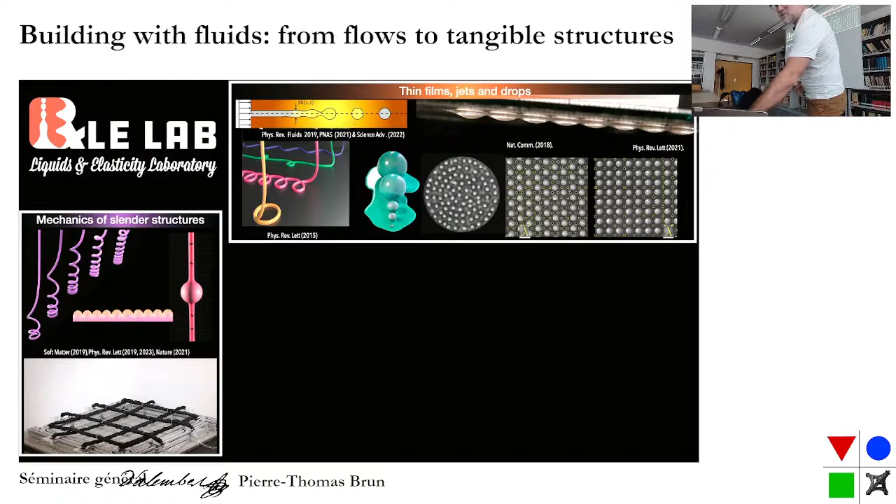So films, droplets, I'll talk a lot about that, elastic rods and membranes, and with a passion for shape-changing structures like this inflatable. We also did some fluid-structure interactions, unconventional, let's say. So this is a rubber balloon, and we did also some multiphase flows in deformable structures. I will not talk about that. Today I'll talk actually about this empty box here, which is the conduit that you can have between fluid mechanics and elasticity.

And the way I want to introduce this idea is through a little bit of rheology. So this is the rheology of an elastomer that's cross-linking. You don't see the line very well, but the blue one basically is a loss modulus, so tells you how liquid something is. And the orange is the storage modulus, so tells you how elastic something is. So you see that at the beginning, blue is above orange, and it's a log scale. So it's more viscous than elastic. And at the end, it's more elastic than viscous, right?

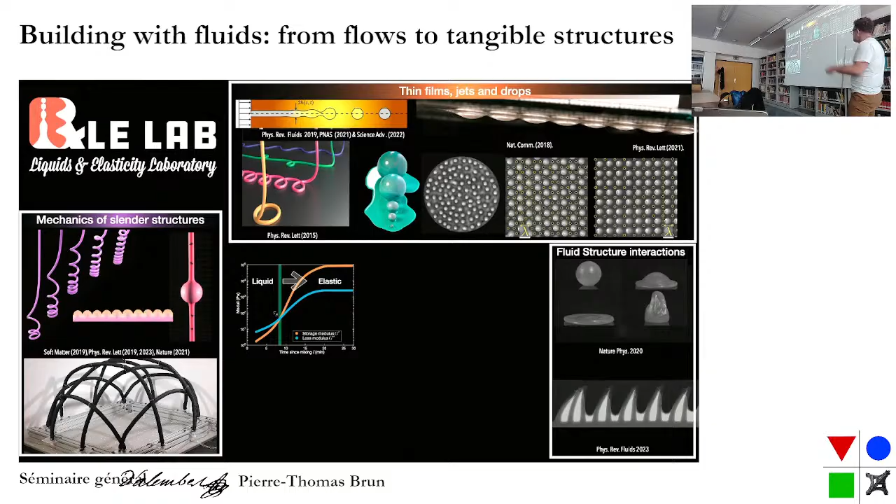So it's this famous polymer that many people in this room know, vinyl polysiloxane, right? And so you mix them, they cross-link, and you go from a honey-like structure to a rubber in 10 minutes or so. Of course, this solidification is something that's pretty common in nature. We have icicles, but also people do this in art, sculpture, for example. But it's also a central aspect of industry, right?

So if you actually look around yourself, many things here were once liquid, right? So concrete, the glass, and so you use their malleable form, you constrain them in a way that they meet your desired ideal. And so what I propose today is to remove all constraints and to let things flow the way they want. And if you do that, I think my video has disappeared, doesn't matter, but you can have interesting results.

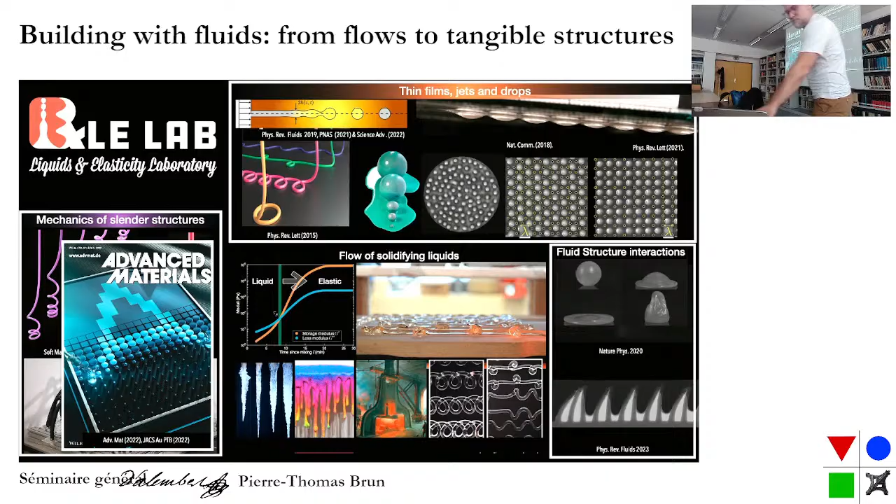So actually, I did my PhD on the coiling of viscous threads, and this is a viscous thread here. The only difference is that this is molten glass. And so when molten glass cools down, you have this nice structure. And so the idea is we will try and see how we can build materials by harnessing fluid flows and interfacial fluids. So why do we do that?

I think you have to live under a rock if you've never heard about mechanical metamaterials, especially here. So I will not spend too much time introducing this, but this is not just about mechanics. It's about many fields of science: acoustics, optics, and functional surfaces. There is this idea that if you have a structure, you can emulate a function, right? So it's also inspired by nature, if you want, and people are working on that quite a lot.

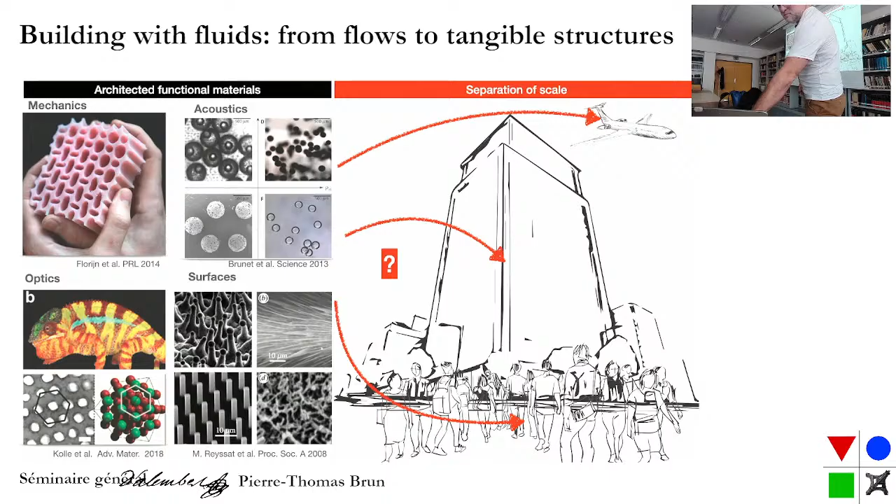One issue, essentially, is that the scale of these objects is typically small. And by small, I mean a few microns or tens of microns, maybe a few millimeters or centimeters. And we're saying, okay, we're going to use this to build our next buildings, airplanes, textiles, and everything. It's not exactly clear how you can master the architecture of something at such a small scale and make it actually available and cheap for everyone to use to build buildings, skyscrapers.

Conversely, if you look around in nature, you go and walk on the beach, you will see very nice and very similar patterns at very large scales, right? Those ones come for free. They come through natural processes. So, for example, the dewdrops here on the spider web come through some variation of the Rayleigh-Plateau instability, or else these nice patterns on this type of ice cream.

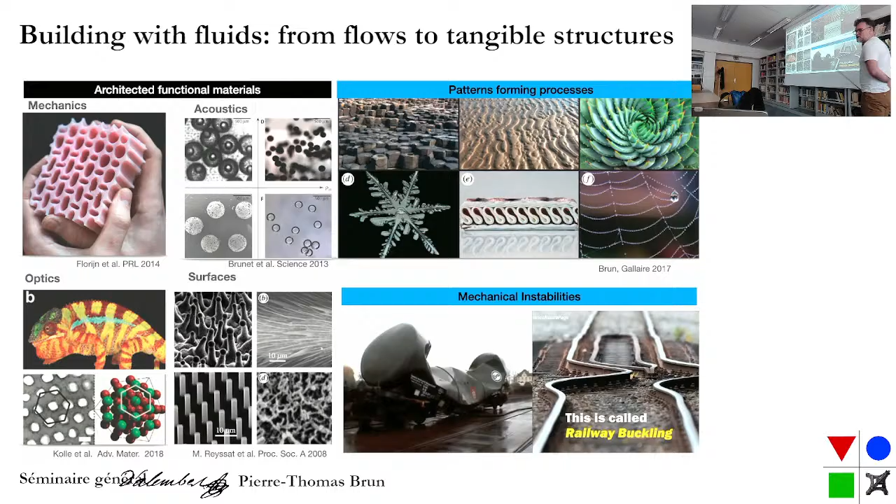And so the thing I want to point out is that many of those processes can be built by mechanical instabilities. And the question that we're trying to understand is, can we harness these instabilities so as to actually build these materials? And people from industry have done this for a long time. So this ice cream, there's just a nozzle here. The ice cream comes in excess onto a conveyor belt. It buckles, and the rest you eat. So you can harness essentially this buckling instability to fabricate structures.

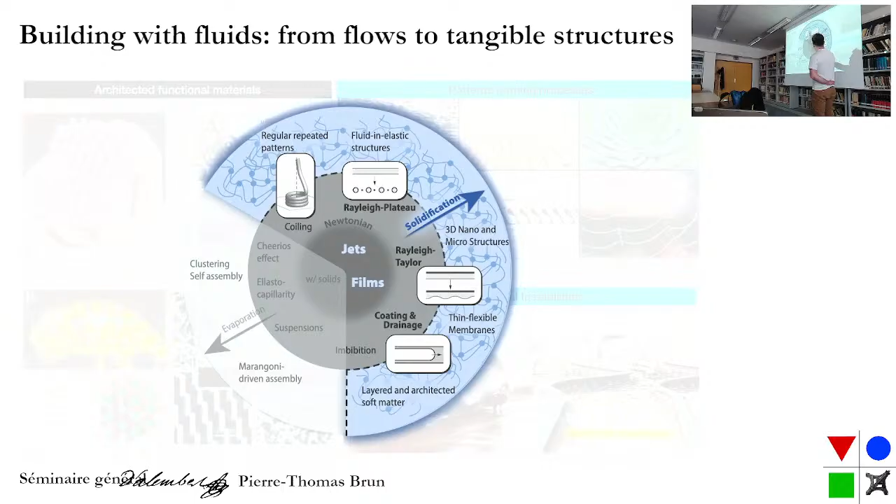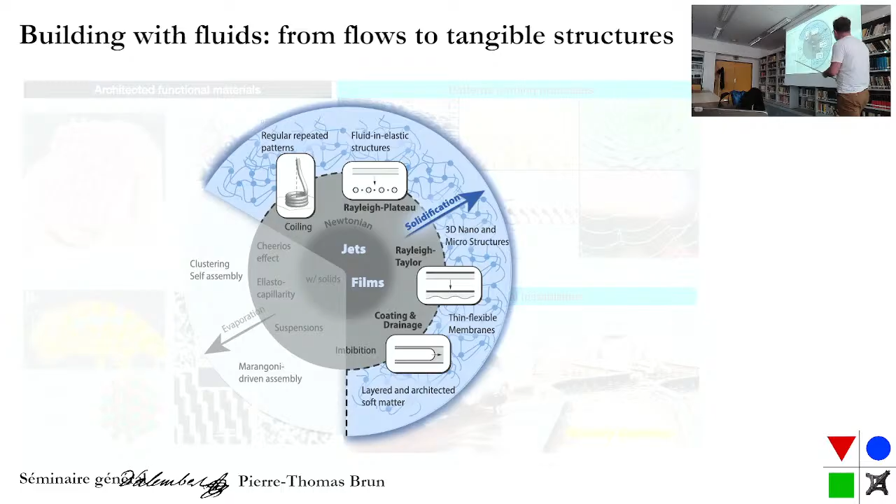And so when I started some years ago, I made this roadmap basically and said, okay, we can go into Rayleigh-Plateau, Rayleigh-Taylor, some other known instabilities, and try to solidify these structures. Of course, those things are well known in Newtonian rheology. They're actually also known in more complex viscoelastic fluids, but people usually don't worry about the solidification of those things. So today I'll talk about too many things, I think, but I'll try to give you a bit of a potpourri, a good aperçu of many of those things, and I'll focus on one instability.

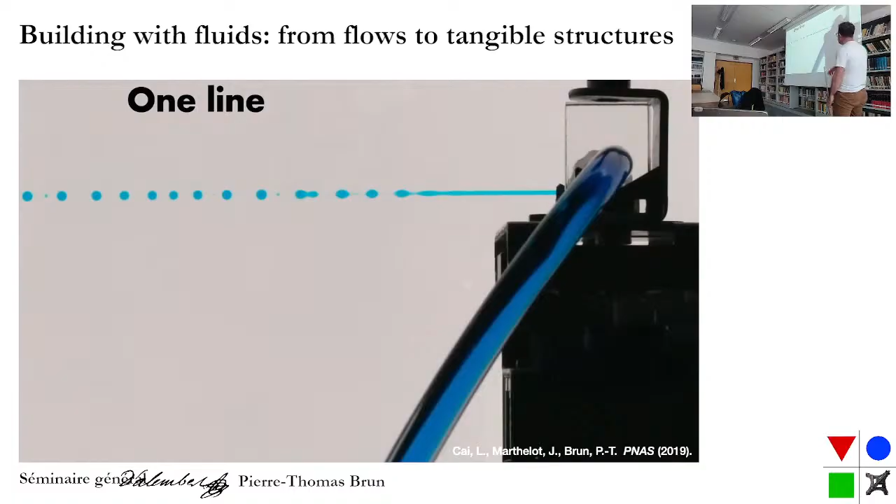So this is just an example. Here, what you see is a bath of oil, a top view of a bath. And what you're about to see is a needle that's dragged inside this bath, and we're extruding glycerol. Glycerol and oil are not miscible. So we're drawing a line of immiscible fluid inside the bath. Without surprise, what happens is exactly what happens when you open the tap. It breaks up through the Rayleigh-Plateau instability, and you have a collection of drops.

What happens is that this, okay, so that's the side view essentially of the experiments. We move faster than we inject, and so we stretch the thread before it breaks. And what you know is that, okay, let's say that this is this stereotypical instability, so K squared minus K4. I have this dispersion relation.

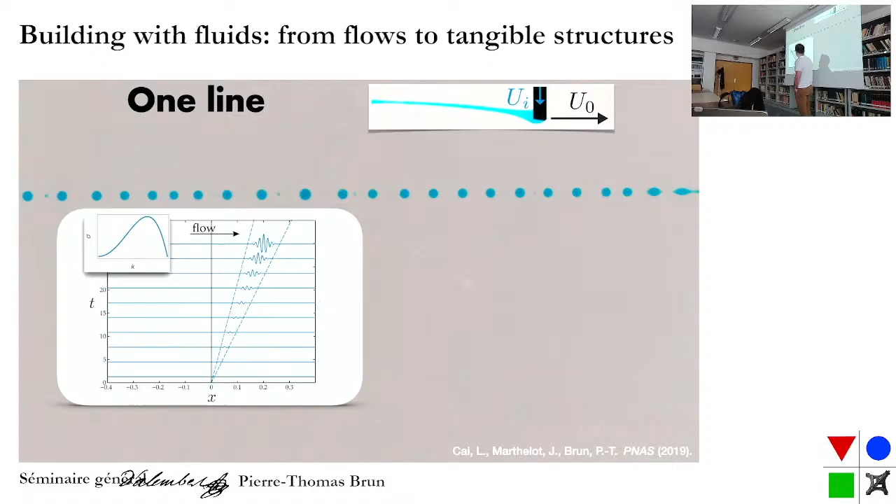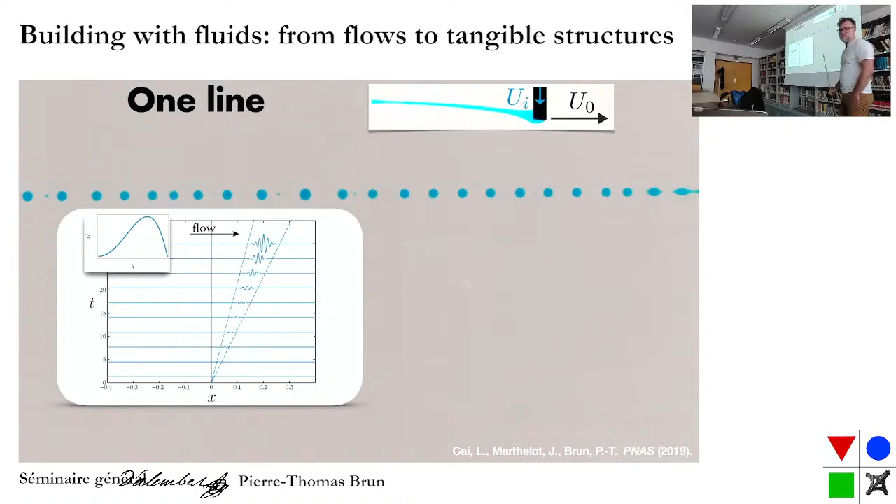I expect that I will only observe the maximum of my dispersion relation as the mode that dominates, but the sad news for this case is that actually this instability is convective, and so you also drag essentially a lot of noise in your system, and so the droplet breakup is not perfectly regular. So what do you do when you fail?

You repeat, right? So now we do the same thing, and instead of just the same first line, actually it's the same moving, but what happens is that we're going to print a second line next to the first one, and then a third, and then a fourth, and so on. And don't worry, I'll accelerate the movie, otherwise it's very boring.

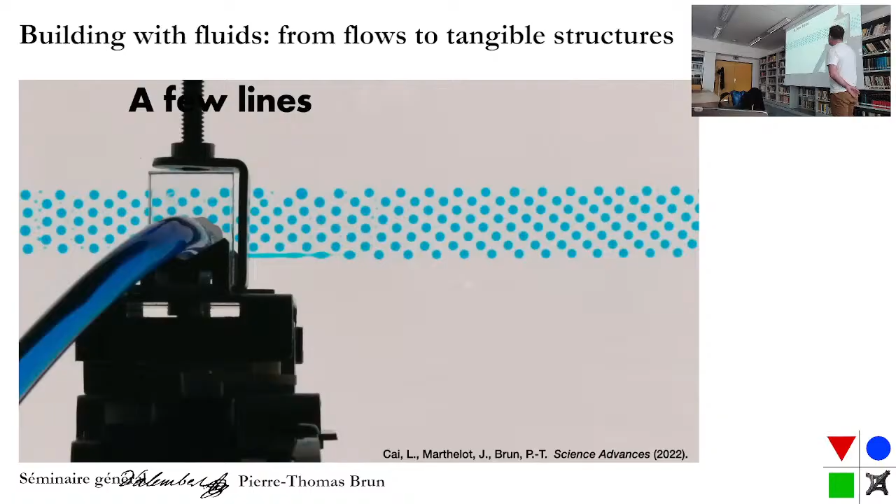But you can start to see that things get better and better, and as you keep going, there is this emergence of something that appears to be very regular. If you look carefully, actually, it's not perfectly regular because of boundaries, but it's actually much better. So, for example, if you plot the drop radius, or if you colorize by the drop radius, you see that whatever defect you may have had at the beginning, after a few lines, these things are forgotten.

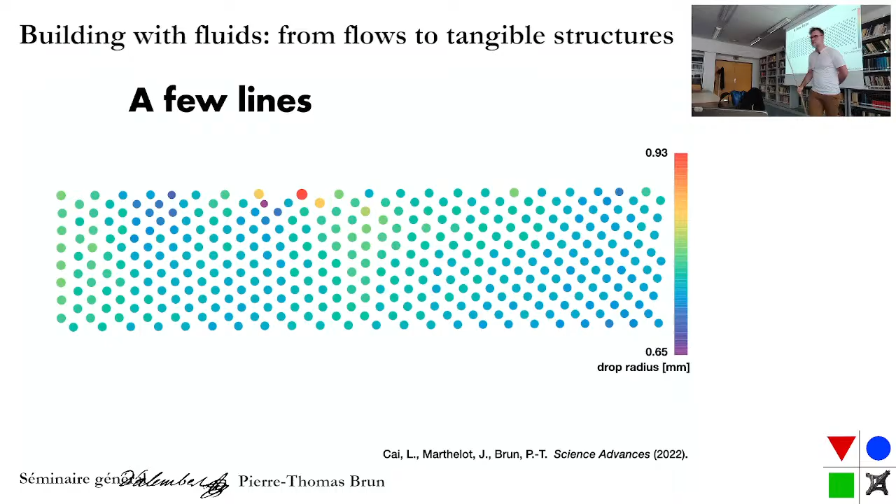And the reason for that, essentially, is that you're taking instability and you're applying instability on top of an instability. And so the mechanism is this one. So we know that when we have an instability, basically we're having an exponential growth of whatever we call epsilon, right? So when this is linear stability analysis, we assume that this epsilon is small, but it's rarely specified what this epsilon is.

And in this case, what happens is that when we're printing a line next to an existing line, the perturbations of this one, they actually are inherited from the previous one. So if you want, it's like if you were taking some sort of convolution of this perturbation by itself. So it gets more thick and more thick.

Another way of looking at this is you realize that if you take any daughter drops, it always sits at, not the middle, but at some fraction of the distance between these two ones. So if I look at the distance between these two drops, I can argue that essentially this is some sort of algebraic average of the distance between the two mother drops.

Right? And so essentially, initially, you have a noisy signal around the mean, and you're taking an average of this signal, and an average of this signal. If you take a running average of something that oscillates, you know that you're going to smooth essentially to something which is flat. So you're converging to this mode. I spare you a lot of details, and I take a lot of shortcuts.

But the one thing that we also know is that these things are sort of alive. So when you drag the next lines, the drops move back and forth. And so you can basically create all kinds of crystals that have the same wavelength, but that have a different phase, right? So like this, these two pictures, they have the same wavelength and then a different phase.

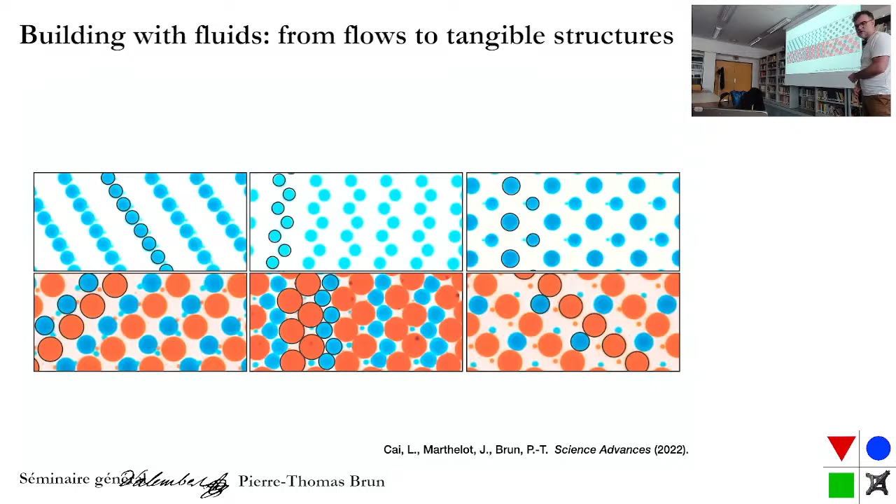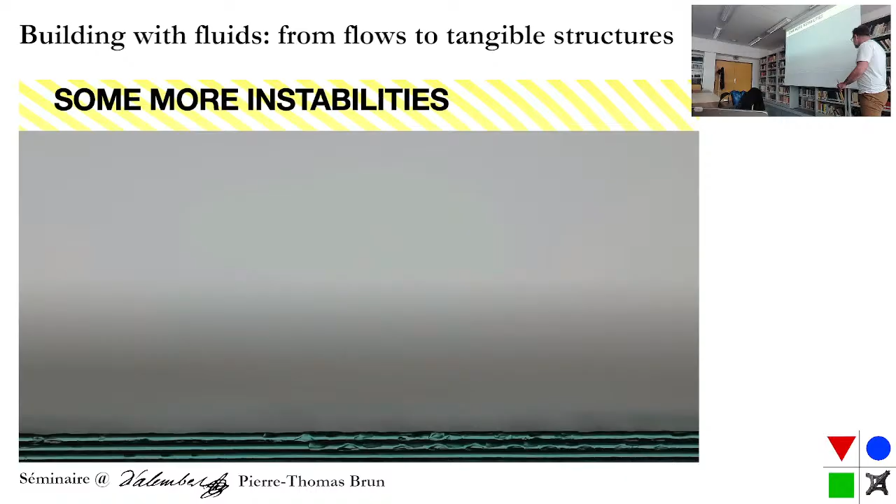So that was the first story. I'll showcase another instability, mostly because we don't really understand it, but it has similar features. So this is an FDM 3D printer. You're printing just regular lines, and three lines have been printed. With this printer, you're trying very hard to break it. So we're actually under-extruding, meaning we're not providing enough material to build the wall. There is a lack of material, and what we observe is this.

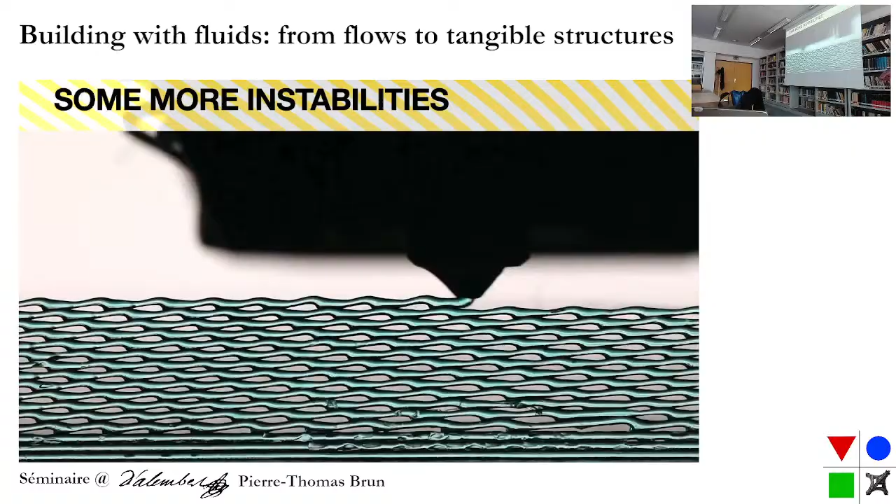Instead of having a thin thread that we're stretching, we see the occurrence of this type of instability where it forms a sort of dotted line. This isn't very regular because we're close to the onset, but you can get much more regular structures. What happens is that as you stretch, the thread cools down very quickly, and as it cools down, it's impossible for the feed to arrive back to the thread. So you're forming a drop that will eventually impinge on the previous generation, and like this you're building this type of memory. Unlike the previous one, there's a coupling between the flow and the curing, but we don't fully understand everything, so I won't say too much about that.

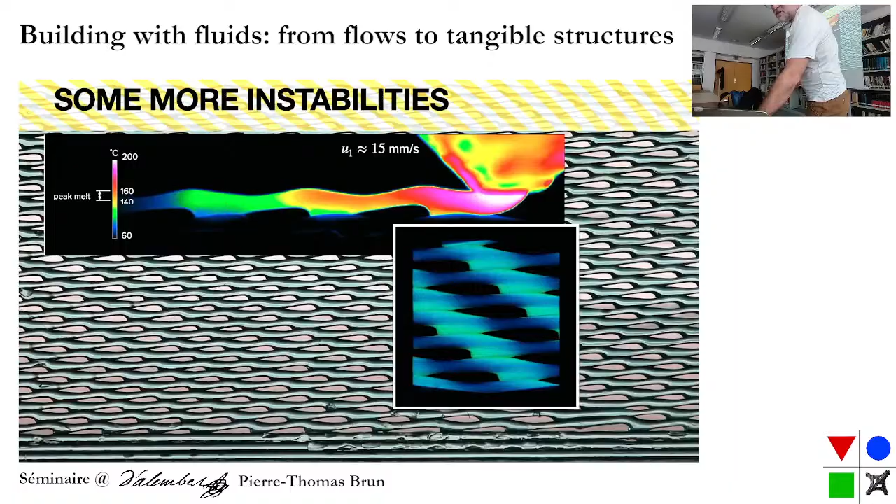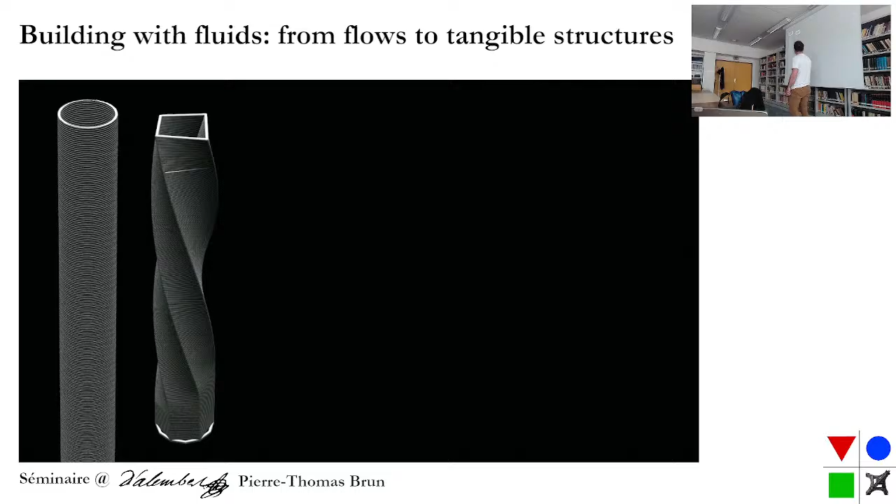I will say one more thing: you can make towers. If you make towers, you don't have enough material, so instead of forming this nice cylinder, the rope takes shape and you anticipate the formation of structures that look like this, and indeed that's the case. All these prints are the same in that we're trying to form essentially a cylinder, but we don't provide enough material, so we see the appearance of these nice structures. But this is merely advertising because, like I said, we don't understand everything in this phenomenon.

Yes? Sorry? Axis? Yeah, no, this is just a set of pictures. But you can find that basically the less material you provide, the fewer corners you will have. So the more material you have, the closer you are to this.

A few buckling-like modes—it's not buckling at all, but it looks like it's buckled, and actually it's the same thing as the previous instability. If you have less material, you convert to something that looks like this, which I think is a different instability. And the less material you provide, the more you'll eventually get to something that looks like this. So indeed, these ones have less material than those, and less material than those.

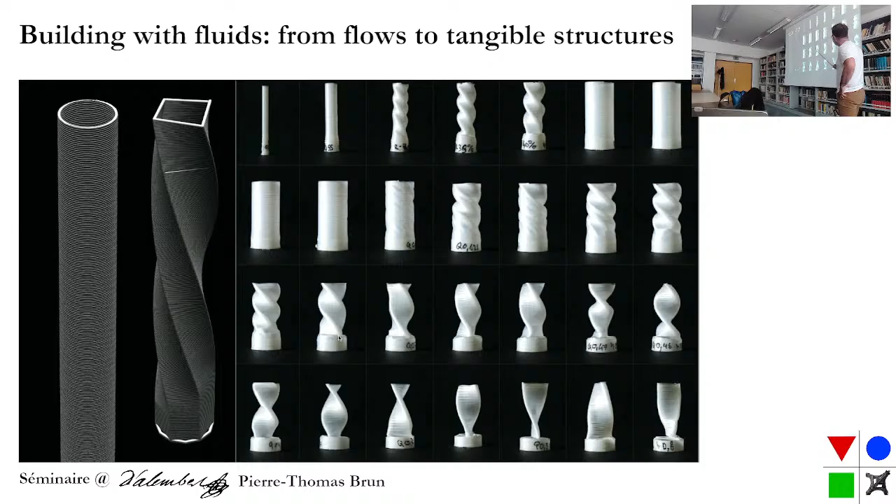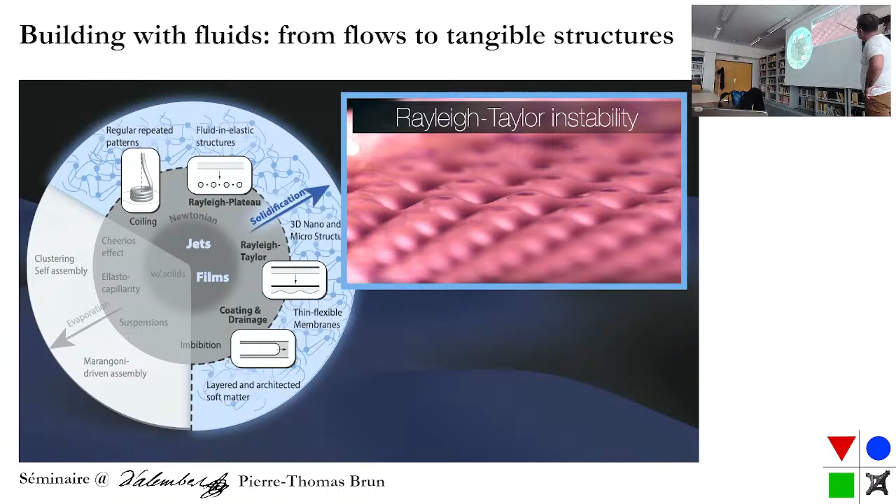Okay, so I'll move to my second story, about the Rayleigh-Taylor instability. This story actually started at EPFL, a long time ago. It's what happens if you coat a flat substrate and flip it upside down, or it can happen by accident if you apply too much paint on a roof—it will destabilize and create drops. Or when you're cooking pasta, on the underside of the lid, you'll see these instabilities forming. You don't see it very well here, but this is a polymer, polyvinyl siloxane, coated on the underside, and now we form this nice network of droplets.

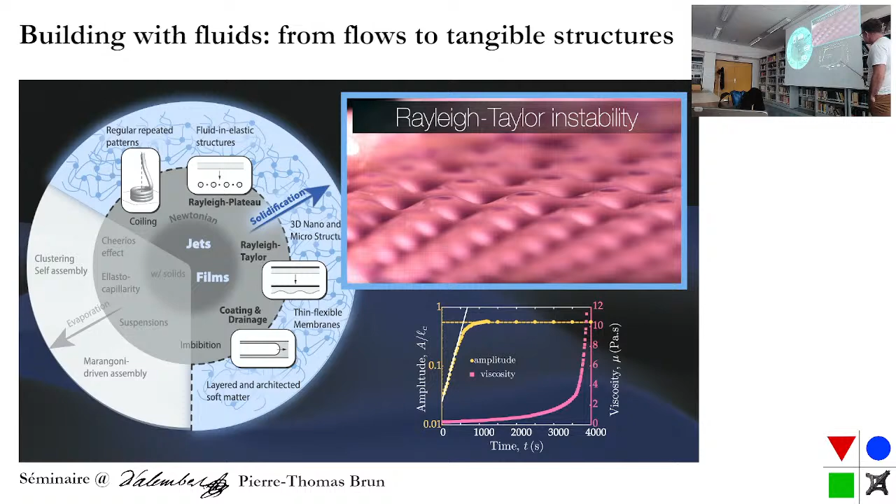This is the viscosity of the polymer as a function of time—basically a doomsday equation. You have mu, which is mu zero, the initial viscosity, divided by something that goes to zero violently, at about 4,000 seconds. But for the time of the experiment, this is more or less constant viscosity. And then these droplets—this is a log-lin line—have an exponential growth, and then when they're lacking material, they saturate, and their size becomes constant over time, and eventually things are cured.

And because they're cured, you can do things like inflating these things. Don't ask me why, but you can inflate them just to show that they're elastic.

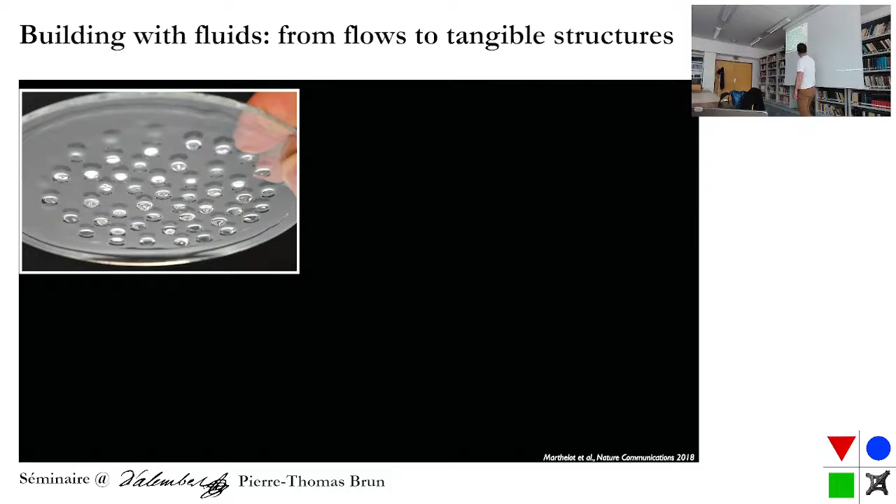Okay, this was actually a very nice idealized view. The reality is that even if you work very carefully, what you will obtain looks more like this, right? And so what I mean by this is that there are big drops and there are small drops. Another way of looking at this is you can take a Voronoi tessellation of these drops, and so you see that drops basically have access to different volumes of material. And so, where you were expecting maybe a hexagonal lattice, you actually get something that's a little bit more messy. Okay?

And again, that's the same idea as before. Essentially, this instability starts where the defects are. The defects are usually at the edge, so you propagate in waves in the form of rivulets. The rivulets grow, they break into drops, so there is a long and complex history. After the droplets are formed, they can still talk to each other. They flow, they can merge, they can drip. So there are all kinds of complicated stuff that happen.

But what we discovered with Joel is basically that if we were to make little holes into the plates in which we're making these coatings, and by holes, I mean we actually laser impulse on the acrylic, so we make little dents, and we make these dents at a size that's about the size that we expect from the instability, right? So everything is in the about, right? So the distance between droplets is 2π√2 the capillary length, so 10 times the capillary length.

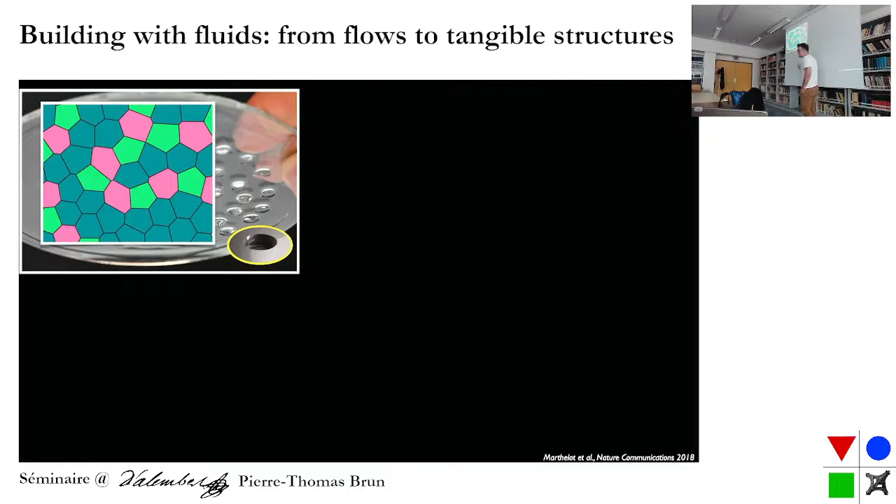And so if you respect that and you run the experiment again, then you get a very nice network of droplets, right? So you can have a hexagonal, triangular lattice if you want, or a square lattice. And in both cases, these drops now have the same size, right? So you can tame this instability by providing defects, if you want, in your initial condition, which will be amplified by the instability. So it's a bit like the first story I mentioned.

Interestingly, you cannot push your luck too much, right? So if there is this mode, that's the expected mode. If you go too far, too small, or too big, then you're going to run into trouble. And this is about the same margin. So too small is about 40%, and too big is about 140%. Right? And why we get this, for the 140%, it's more or less clear. You have like a period doubling instability. For the 40%, it's not really clear what's going on.

Okay, but what I just talked about is nice, but it's also a bit of a fail, right? Because we were talking about making instabilities for materials, and now we have scales that are about a few millimeters. So this is big. For anyone doing material science, they see millimeters, they're just freaking out, right? So how do we make things smaller? Well, I said that the distance between drops was basically driven by the capillary length, right? And the capillary length is the square root of surface tension divided by density times gravity, right? So surface tension, especially under a square root, you cannot change too much. Density, it's already 1,000 to 1, so it's as good as it gets.

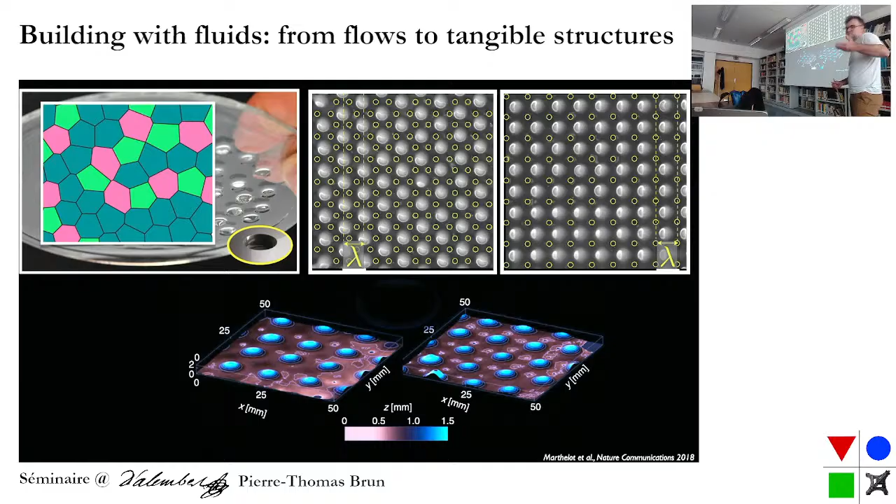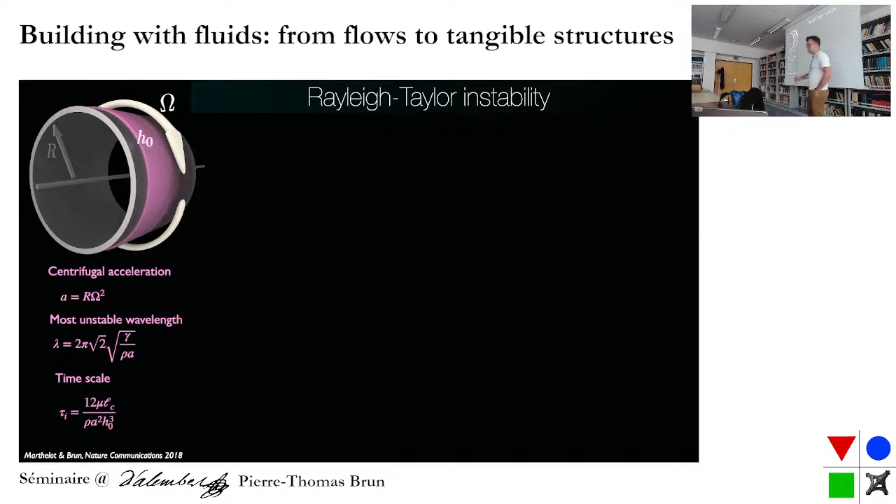And the only thing we can change is the acceleration, not gravity, but we can try to find another source of acceleration. And so in that case, we use centrifugal forces. So we coat the outside of a cylinder, and if you coat the outside of the cylinder, the physics remains the same, but basically, the faster you rotate, the smaller the drops you will obtain. Okay, but again, the physics remains the same. So I go a little bit fast, but essentially you can change the acceleration by orders of magnitude, and then you change the drop size by orders of magnitude too. Unfortunately, there's a square root, so of course you work hard.

And you get these drops that are essentially pendant drops, right? So we're all very familiar with these pendant drops, but just their scale is different. So you can play a game and build like a Frankenstein droplet where you patch things of very different scales, but that's the same. Interestingly, you could go much faster, but then that's also where centrifuges could be used for military applications. So that's usually a good place to stop.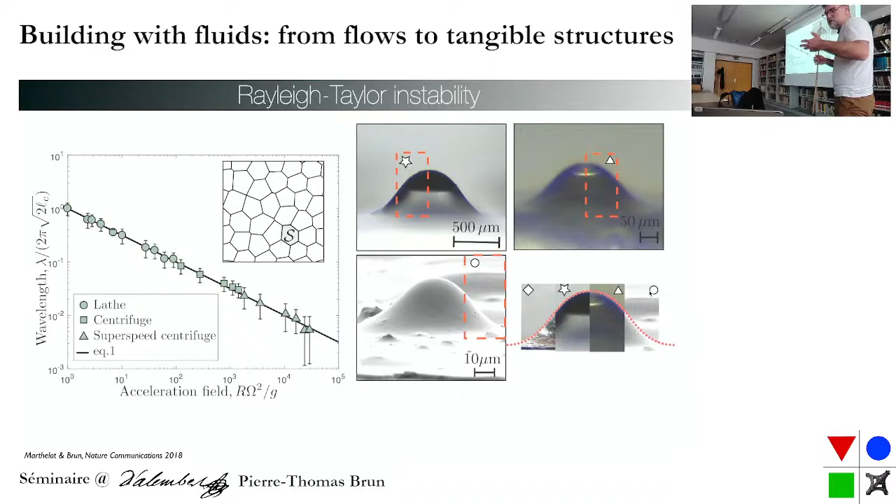And I say you can go much faster because we're still at microns. People have done Rayleigh-Taylor to tens of nanometers, so there's no problem to go smaller. You don't run into van der Waals or anything like that for quite some time, right?

Okay, but at this point there's still no effect of curing, and then someone else came into play, Etienne Jambon-Puillet, and with Etienne what we looked into is this idea. So now we rotate, we get these drops. But what we do is we go back to this plot I've shown you and these two curves, but at some point they cross. It's a little bit arbitrary, but this crossing point is called the gelation point in rheology.

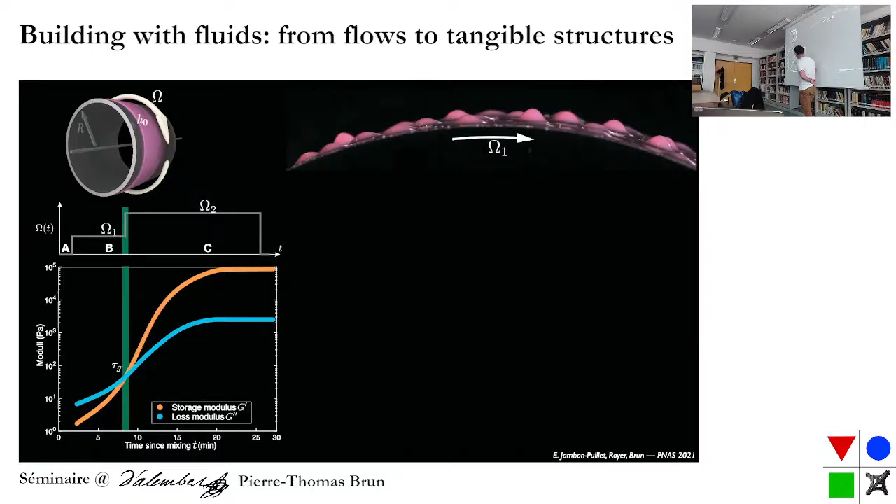And so we say, okay, we're going to increase the rotation speed quite fast at this point in time. At this point you have a viscosity which is of the order of tens of pascals. But then as you increase rapidly, something might happen. The cross-linking continues, and eventually you get an elastic material all the same. So first, when we increase, it's already a gooey substance, so it's not going to flow and make other droplets. It's actually going to stretch and create these hair-like structures.

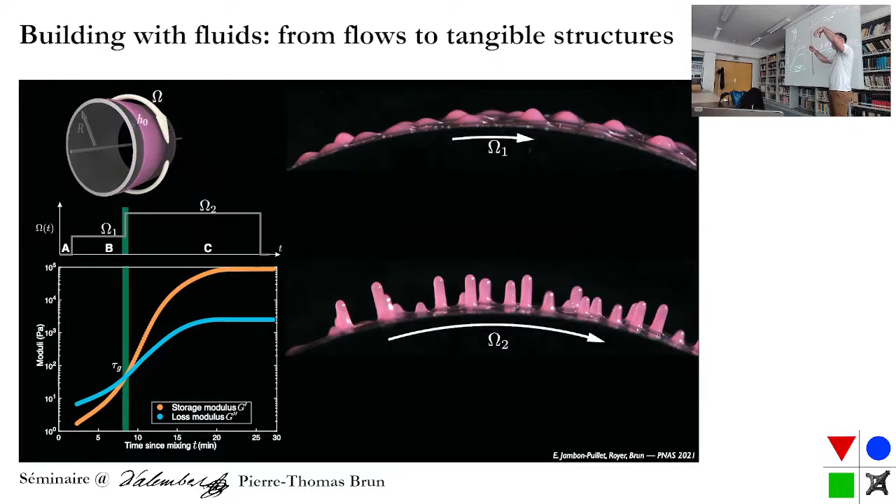And what else? Well, nothing, right? Because you create a new reference shape, which will cure. And so when you go back to zero, these guys stay. So you stretch them, they cure, you relax the speed, and then they just stay the same. Okay, and so we want to understand how they're formed.

It's not very pleasant to watch a cylinder rotating, so this is a flattened cylinder, right? This thing is the cylinder. And I'll show a movie which represents what happens when we increase the rotation speed. At the same time, I show here some results of a quasi-static simulation, so no dynamics, for a hyperelastic material. Okay, so I'll now show the movie.

Yeah, you have to stay here. Really.

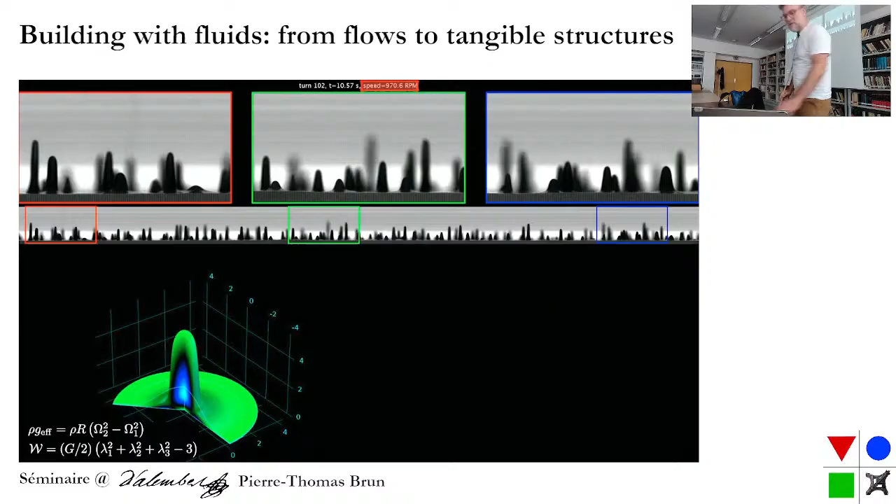Okay, so here goes the movie quickly, and you see the acceleration and these droplets. They actually stretch and create these hair-like structures, right? This is too busy, so forget about that. Just look at this one. So this is a drop.

The red dotted line that you barely see is actually the integration of the pendant drop equation. So we have a pendant drop. And then as we increase the rotation speed, we stretch this shape, and eventually we find this thing. And I superimpose here the results of finite element simulations for a static problem. You see that essentially it works well. So that's my justification for why I don't want to worry about viscoelastic effects or anything dynamic.

Okay, so you can plot how much you're stretching as a function of a dimensionless parameter, which represents the ratio between the acceleration you impose and the elastic resistance. And you see that things collapse more or less. They don't perfectly collapse because basically you stretch more if you're bigger, right? No, actually you stretch more if you're smaller. Sorry, the blue ones stretch more than the yellow one.

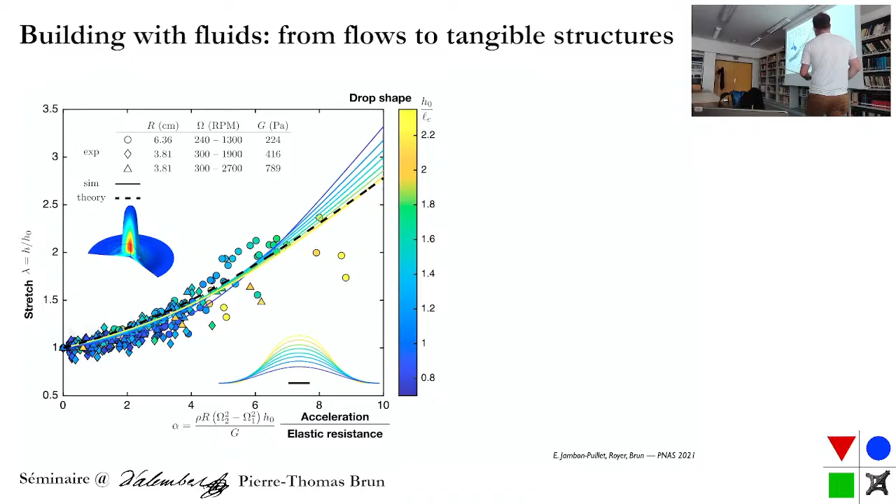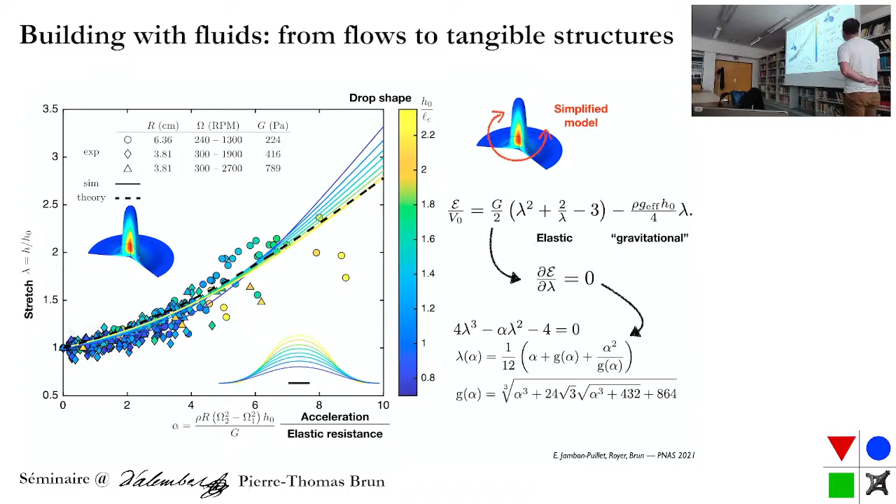But if you forget about this and try to predict this trend, you can say, okay, I have a piece of rubber. I can write the energy with an elastic component and a gravitational component. I minimize that and I find some ugly formula, but this ugly formula seems to work pretty well. And the nice thing is that with a theoretical expression, I can predict what happens to the distribution I had initially.

Initially, I have a distribution of droplets, which we fitted with a log-normal fit, centered around 1, as we expect. As we increase the rotation speed, we stretch this thing, and so we flatten the distribution. Initially, the model predicts the distribution pretty well. This is for 14 times gravity. For 27 times gravity, it's not so good. And for 88 times gravity, the prediction and the experiments are quite different.

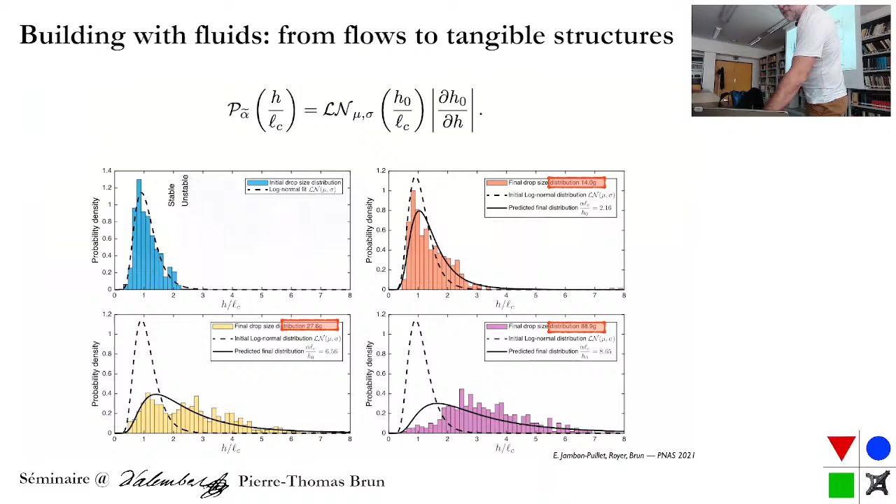Okay, so we were happy for a number of reasons, but in particular because we managed to make this high aspect ratio structure, which is suitable for some applications. However, what you want is high aspect ratio and high density. And here we're actually not accomplishing this because the density is inherited by the low acceleration case, so they're quite far. So we stretch them, but they're still quite far. So the question is, how can we make them tall and close?

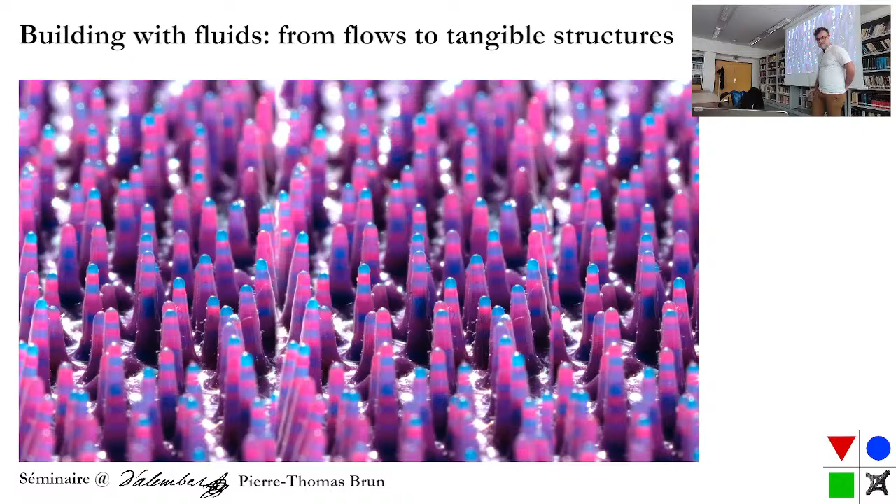So tall and close, here they are. Now they're tall and close. So how do we do that? You realize by looking at this that there are two colors, blue and purple. And what happens is essentially that we're coating, turning, waiting, taking it back, coating again, turning, taking it back. So we apply 10 or 11 coatings. And this is with just the exertion of gravity.

So initially, you have your drops here for one coating, so this sort of irregular distribution of drops. And in yellow, we color new drops. So initially, we were here, n equal 1. And so you see that you don't have that many drops compared to what you're supposed to have, which is this prediction from the stability analysis. And you're also, conversely, the wavelength, if you want, is quite high. So we're almost at 1.25 compared to the one we were supposed to have.

And if you apply another coating, you see new drops appearing wherever there was too much space between already existing drops. And after 3 or 4 coatings, there are no more new drops that appear. And you're converging to something which is actually what is predicted by stability analysis. So you're quite far from the linear problem, but the predictions actually work fairly well.

Okay, so we were interested in understanding how tall these things were and how different they were from each other. So you can look at the mean height of those things. So they grow linearly with the number of coatings, and basically they grow with the capillary length. So every time you're applying a coating, you're adding a little bit of volume, which of course scales with the capillary length. That's not very surprising. But what's a bit more surprising is this.

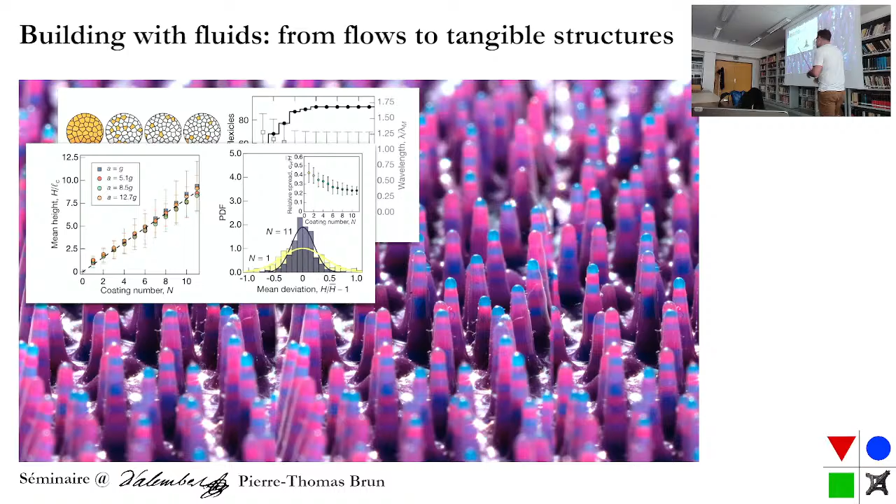So if you look at the experiment, it feels like it's quite uniform. If you plot the data, you see that the size of the error bar is increasing, right? But actually, as humans, we're not sensitive to the absolute size of the error bars. You're sensitive to the size of the error bar with respect to the size of the object itself, right? And so if you divide the size of the error bar by the size of the object, what you see is that the relative spread is decreasing. So they're sort of almost converging, but not quite. So there's always a difference between these hairs, but they're less and less different in some sense.

Okay, so what are those? So you can take one, you slice it in the middle, and you see that we applied multiple coatings, and there's a number of things that you can observe. The first thing is that you sort of alternate big droplets and small droplets, but it's a bit of a chaotic process in this case. However, on the edge of the drop, there is always a very thin and uniform film. So you're combining a thin film, which is quite uniform, with pendant drops, which are not uniform.

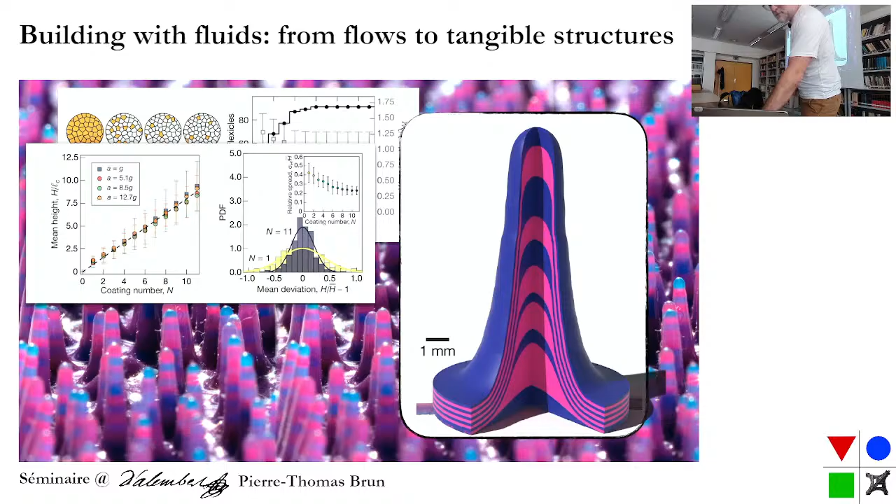Okay, I don't know why I show that, but what you can do is take an average, if you want, of all these shapes. And if you take an average of all these shapes, you get something that looks a bit like a cone. And essentially, this is not a big surprise because you're stacking things that grow linearly with the number of coatings. And then you're adding a little bit of a thin film, which is also proportional to the capillary length. And so if you combine these two things, and I go a little bit fast and I'm a little bit casual, you can prove that essentially you have a cone with a specific angle, and you can integrate this sort of stereotypical shape, and you find something that looks like that.

So I've been hiding a few things under the carpet here, but I'll leave it like that for now. Okay, so we were asked by reviewer number 3, what could we do with these things? And so they're actually fun to touch. So I said, okay, let's see what happens when we touch them. So you have a carpet of hairs, and you're going to come and indent them with, in this case, a vertical plate,

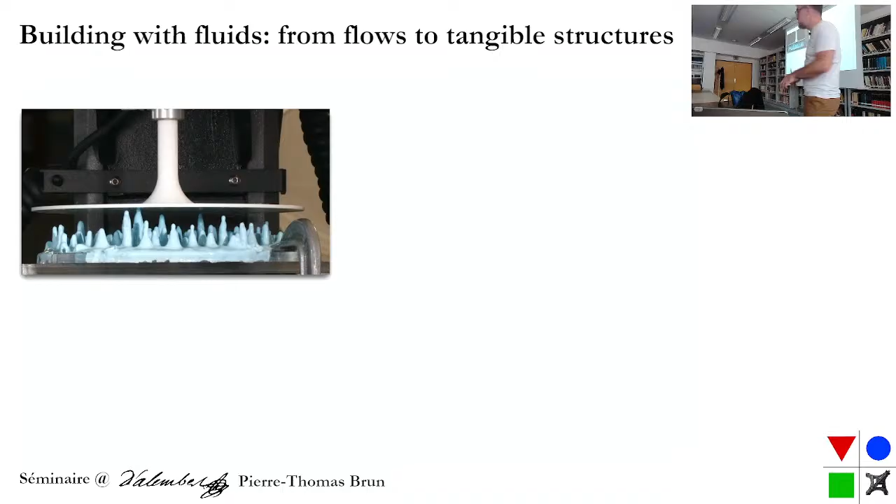The force actually is increasing for 2 reasons, right? So you have this bump, these fingers, and you're compressing them, right? So if you think about them as being elastica, actually they're sort of compressible elastica, so you compress them a little bit, and then they buckle. So it makes sense that you will increase the force initially.

And what's interesting, at least for us and for reviewer 3, is that the force can be actually predicted by just counting how many of those hairs are in contact. Because I know their size, I know their distribution. So if I can count how many are in contact, I can tell you what the force is. So it's a minimal force sensor, so we say.

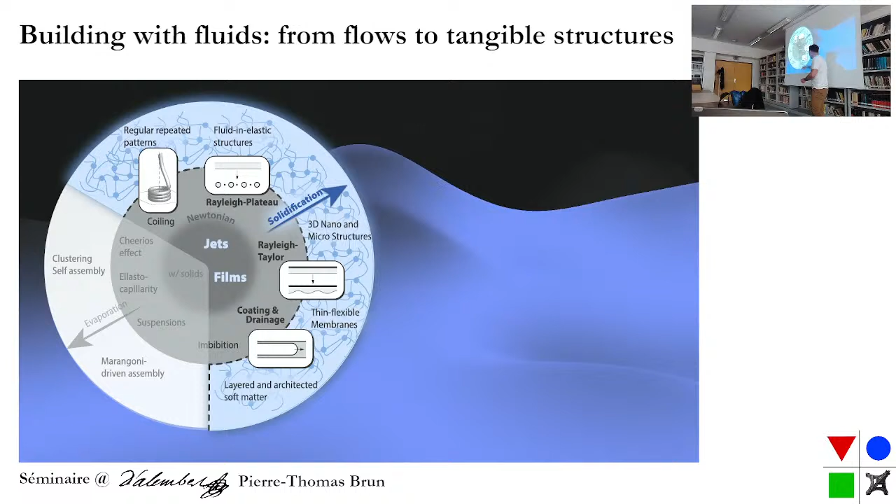Okay. So with this, that's my segue to my last story. And this is a story also about elasticity. There will be no more pattern, or there will be no more instability. But we're going to look at a fairly simple experiment. So the experiment is the following. So this is a tube.

And this tube is made by carving actually 2 half cylinders into 2 acrylic plates. So we have 2 acrylic plates, 2 half cylinders, you put them together, and that forms this thing. The black stuff are screws. But for the purpose of this presentation, this is essentially a tube that has a tortuous path.

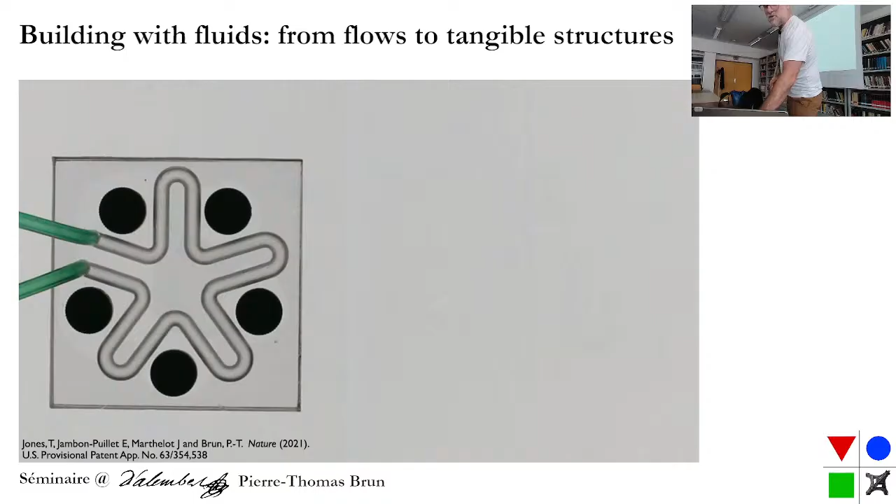And so what I do, and I'll show the movie a couple of times, I inject this elastomer that we've been talking about. And after I'm done injecting it, I actually push some air the other way around. So I play again, you will see the elastomer invading the space. And then as you push the air, you see a bubble moving quite quickly through this network. Okay, that's the end of the active part of the experiment.

Then you wait for 10 minutes. And during the 10 minutes, 2 things will happen. Gravity points this way. So whatever you've been coating, your cylinder will drain. And then this thing will cure. And so once you're done, you can take it away. And you inflate it, because that's a balloon. So what you do with balloons, you inflate them. And you have something that looks like a gripper, a soft robotic gripper.

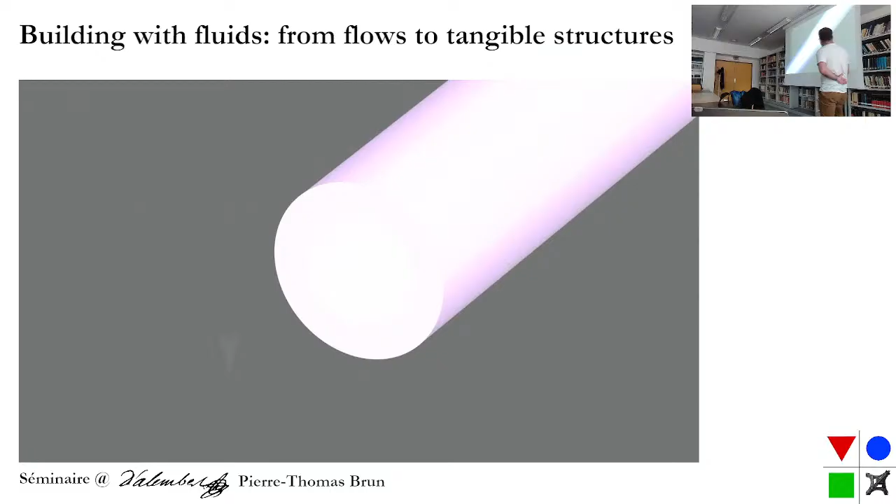Okay, so this is my cylinder. I push a bubble. I'm carving this cavity, a Bretherton-like flow. I have initially a cavity that sits in the middle, and as time passes, the fluid drains or the bubble rises, and then eventually I get something that looks like that, which is now elastic. And so if I inflate it, this will deform more than that because it's thinner. And so if you have this excess of length, you will actually move in one direction.

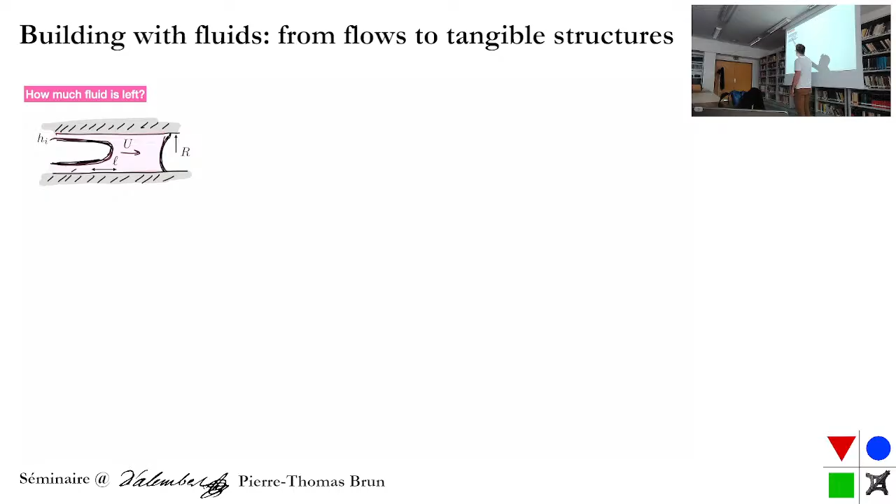Okay, and do that. All right, so classic problem in interfacial flow dynamics. I'm moving a meniscus inside a cavity. I balance viscous effects and capillary effects, and I find that the thickness should vary as the capillary number to the 2/3.

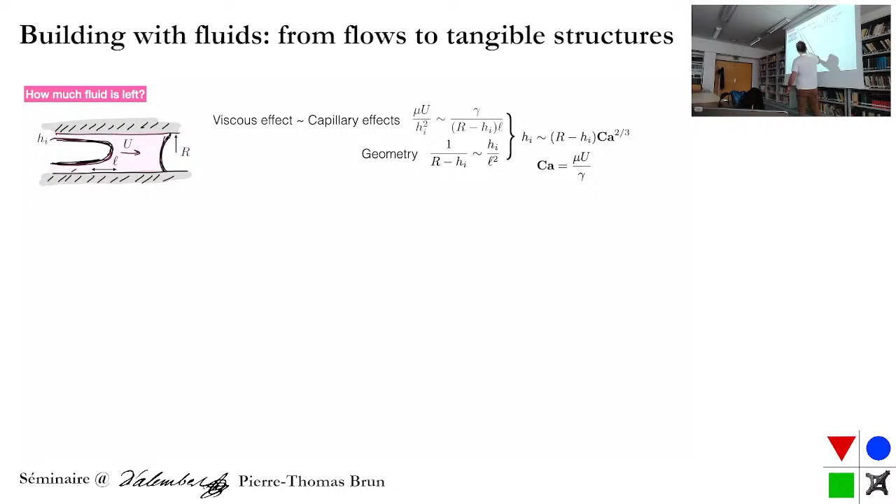In our case, the thickness is quite large compared to the radius, so you have a slight correction to this, but essentially you get this. Actually, the reference is missing, but you get this law, and you can plot essentially thickness as a function of the capillary number, and so you see that you will get to a plateau.

Yeah, that's sort of important. So if you push fast enough, essentially whatever was a 2/3 is more or less something that's flat. And so essentially, as long as you push fast enough, you get basically 30% of your radius as your initial thickness. So that's the initial condition of our problem.

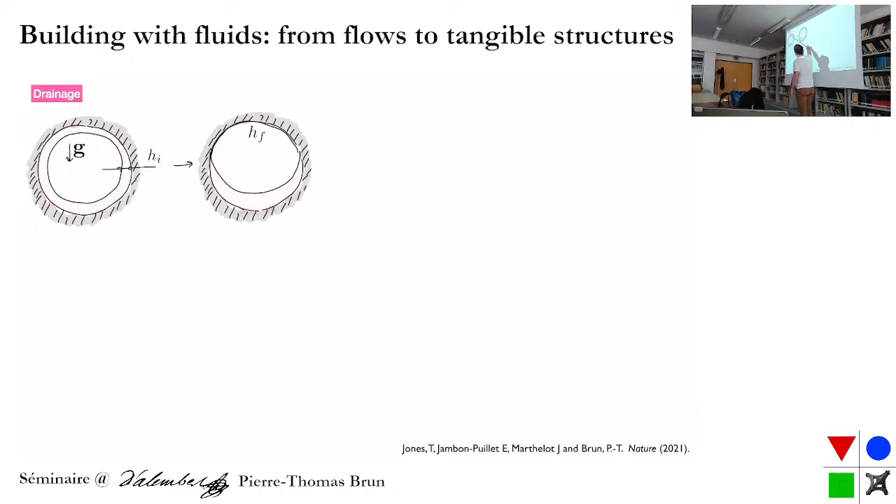And then we write this nice drainage problem, which is a nice math trick, as I will show you in a second. And basically, you write the lubrication equations. Something that has been solved before is the fact that you can find a solution at the top. And then something that we have worked on is the fact that you can generalize this for the angle dependence. But the result is intriguing because the thickness varies with time.

But what you see is that if time is large enough, essentially you can neglect the 1 in your square root here. And so if you cross the 1, you can take the hi squared outside of the square root and you can cross it with this hi here. So the thickness no longer depends on the initial condition. So you go to something that is sort of universal. This is for Newtonian fluid.

If you do the same thing for an arbitrary viscosity, you have the integral of the viscosity. And I said a couple times already, but I'll show it now, that the viscosity is like a doomsday equation. And the doomsday equation, as we know, is almost constant and eventually goes to infinity. So if you do that, you can find the final thickness.

So this final thickness is h sub f and depends on a number of things: the initial viscosity, the geometry, gravity, density, and mostly this curing time. Right? So when is it that this thing ceases to be a liquid and becomes an elastic? So this suggests that if I want to change the thickness, I have to change the polymer that I'm using.

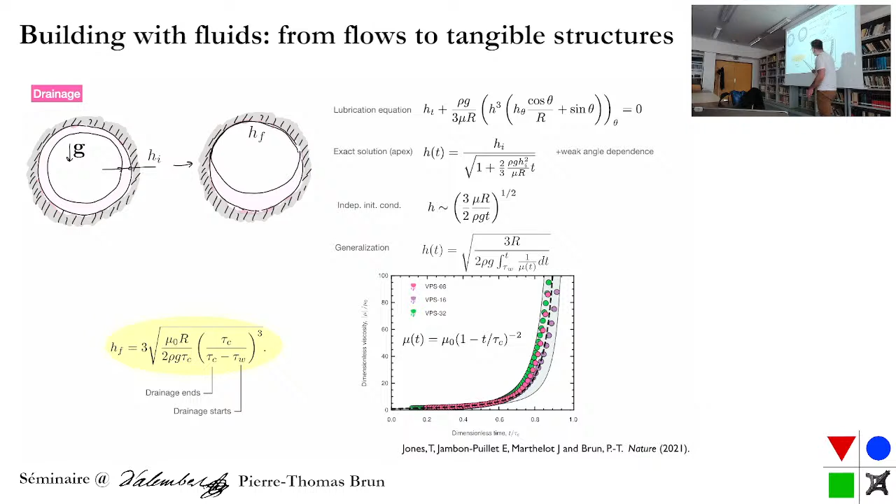But this is forgetting that actually you can truncate this curve by mixing things and not injecting right away, right? And this is what we call the working time or procrastination time. So you mix, you wait, and then you push the bubble. And so that means that basically you can make your curing time appear shorter, so tau c minus tau w, and so you can make your thickness become larger. You cannot go the other way around.

Okay, the bottom part, it's again the same equation as the pendant drop, but just in a bit of a weird geometry. You can find all kinds of shapes, but it so happens that we have a void fraction of 50% as we predicted before, and our dimensionless number between the radius and the capillary length in this case is more or less 1. So we tend to get these shapes. So that's the bottom. We have the top. You can match both, and if you match both, you get essentially this shape. So the green is the experiment, the red is the theory, so it works fairly well.

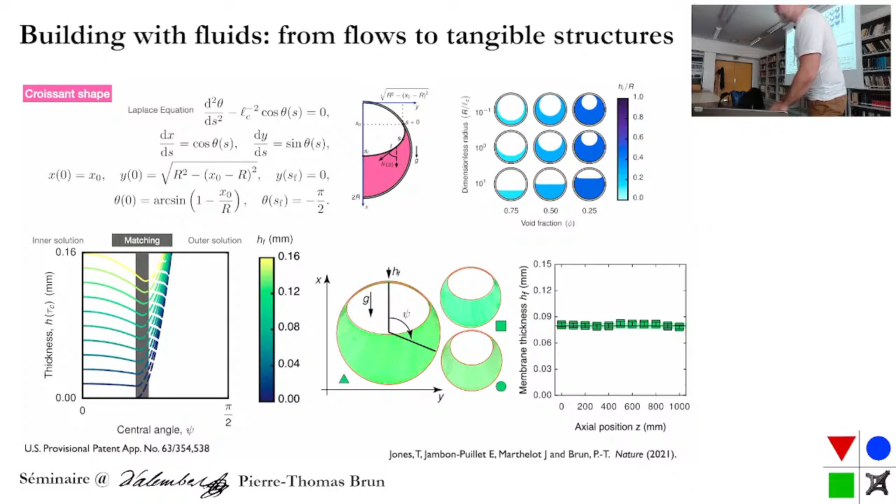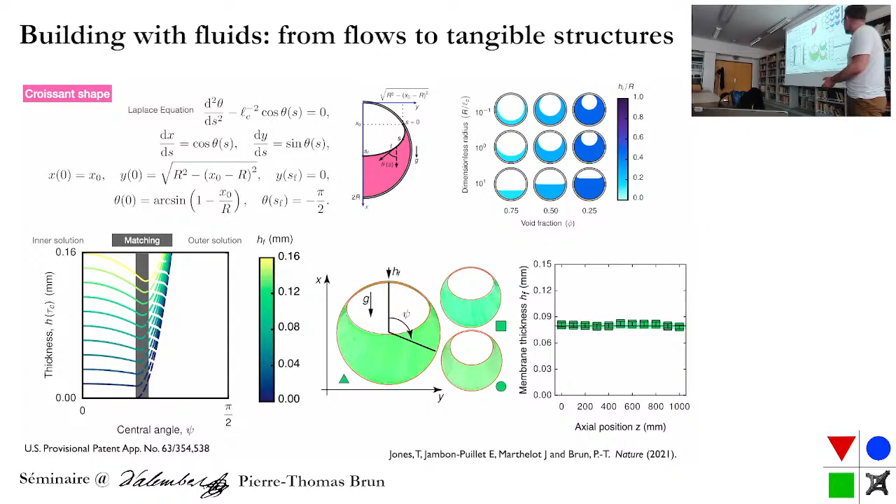And then we have this plot, which appears boring, but is very important. So the plot shows the thickness at the top as a function of the position in the tube. So that's a different tube. It's a very long tube, 1 meter. And what you see is that the thickness is actually 80 microns, plus or minus a few microns, and it's very uniform. And this is done without any fancy equipment. You just have to push with a syringe by hand. As long as you go far enough, you get this essentially for free. So it's a robust system.

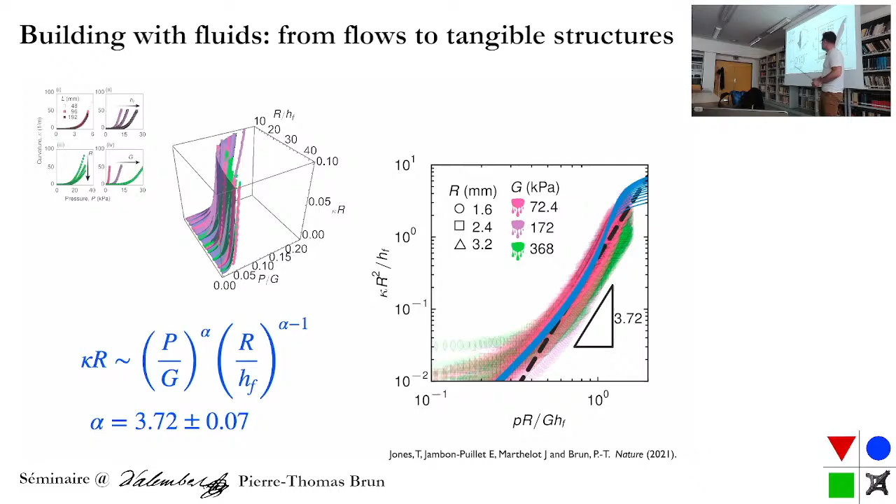Then you can look at the elasticity. I'll go a little bit faster in the interest of time, but as I said, this part deforms more than the bottom, so you're storing excess length in the form of curvature. I really go fast, sorry, but you can convince yourself that the curvature of your actuator will basically depend on the applied pressure, the shear modulus, the geometry, and this h_f here that comes from fluid dynamics. So you have a link between the fluid dynamics of the problem and the elasticity of the problem. You can test whether this formula is correct or not.

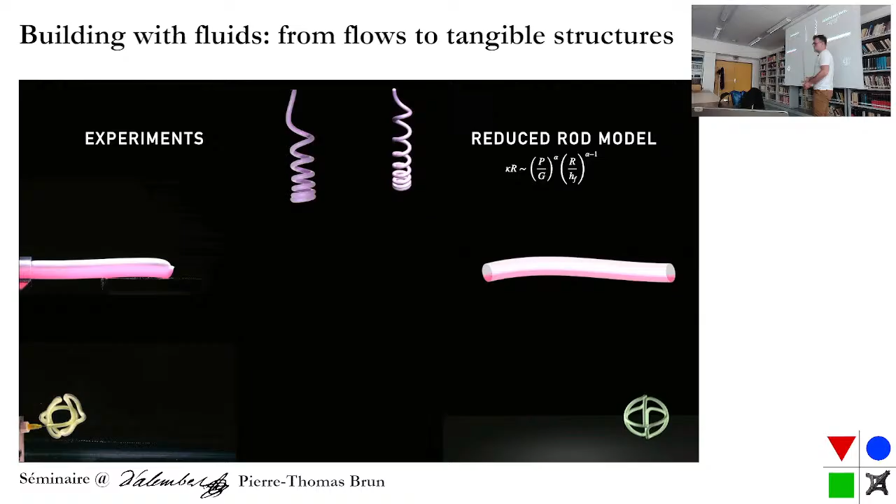Do the same in contact with something, you can do the same. That's inside water, so to suppress gravity. So if you have uniform curvature, essentially you're living on a sphere. And so if you have any random shape, you will form a small sphere that will close.

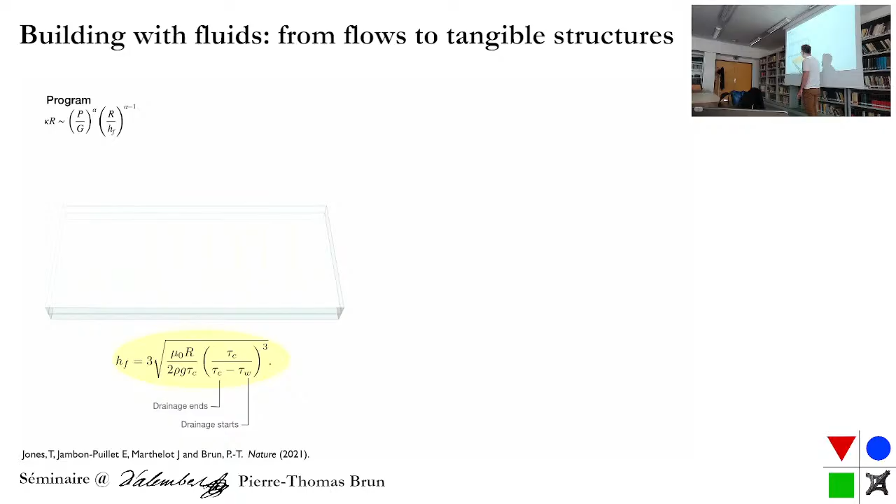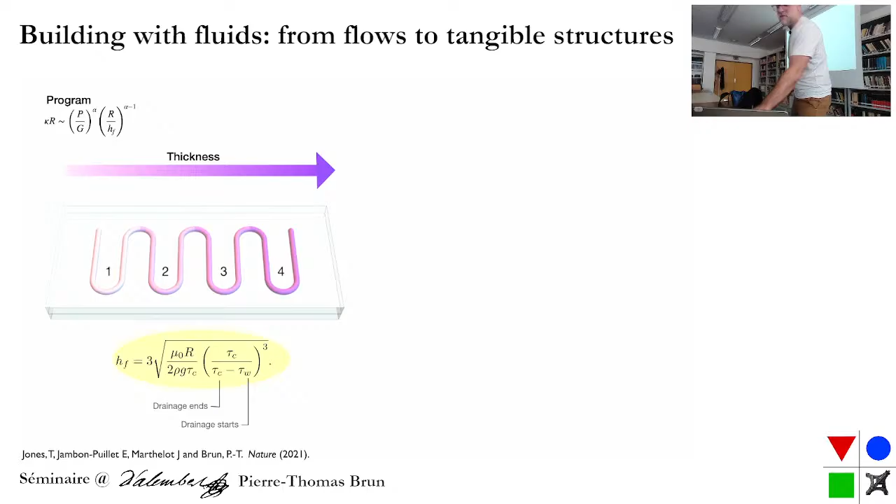And that's maybe the most interesting part, is that I can now change the thickness of my actuator by just changing the time at which I'm pushing the bubble. And so instead of pushing all at once, I'm going to push and stop and carry on. And so if I do that, I can change the thickness in each of these areas. And now if I inflate this contraption with uniform pressure, I have a sequential actuation.

And this is something that's called smart, because you give it a dumb signal, pressure increases, and you get an enriched dynamics, which is 1, 2, 3, 4. So I cannot do 1, 4, 2, 3, at least in this configuration, but you can go 1, 2, 3, 4. So it's a bit boring on the piano, but yeah, okay. I'm not a musician.

Okay, and then we were asked, can you do something special? So yeah, we can catch a ball. So that's the same thing, right? So here we inflate this, and the first thing that happens is that the gripper will grab the ball, and then the muscle will lift the ball. And as you decrease the pressure, the muscle goes down, and then eventually the ball comes back at the same place.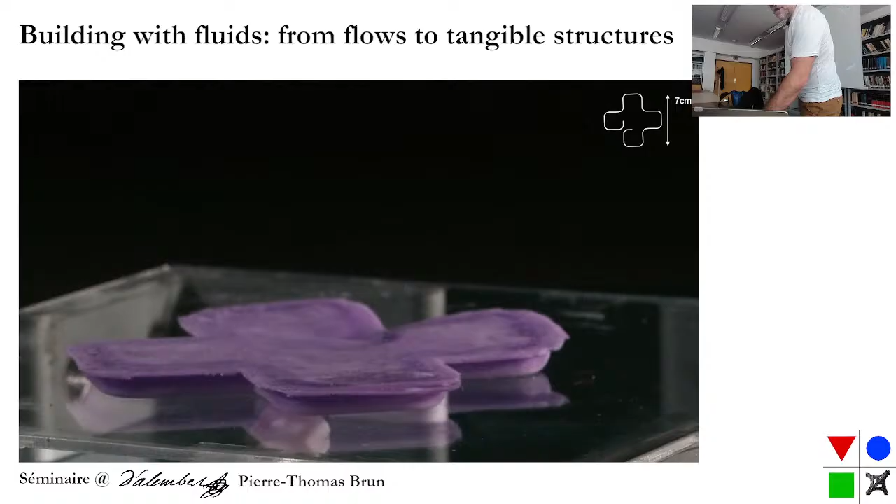Yeah, and then we can add membranes, and we can make cubes, and we can make sharks. And okay, yeah, it's reviewer number 3.

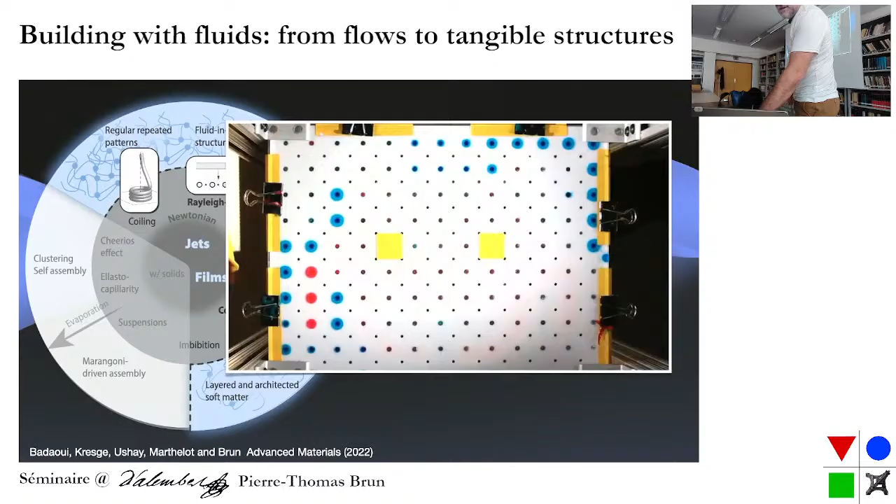Okay, I will go quickly, but just wanted to emphasize that we've done a number of similar-ish problems where we have wicking and capillary flows, where we can program these things to form interesting structures and shapes. We're also now looking at different fluids. So now this is more a foam, which is growing and inflating over time. I mean, this is the foam you buy when you do renovations at home. The shape is very familiar. It looks a bit like sessile droplets, but the scale is different for a number of reasons.

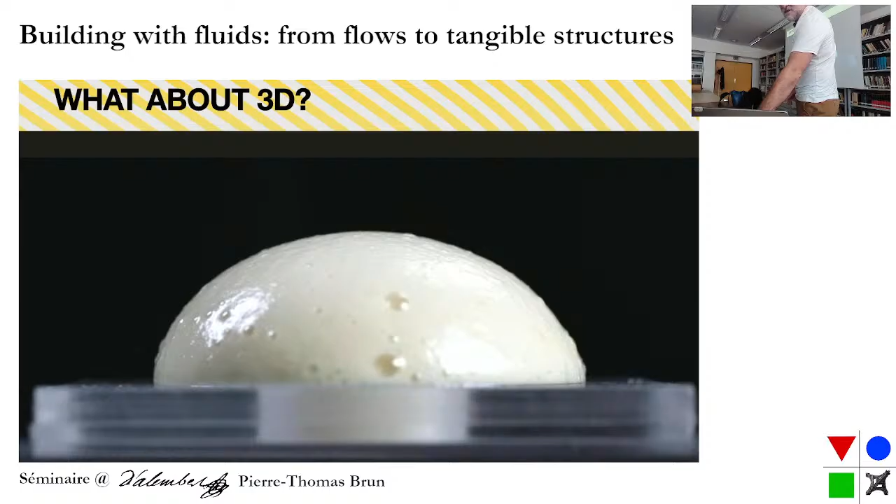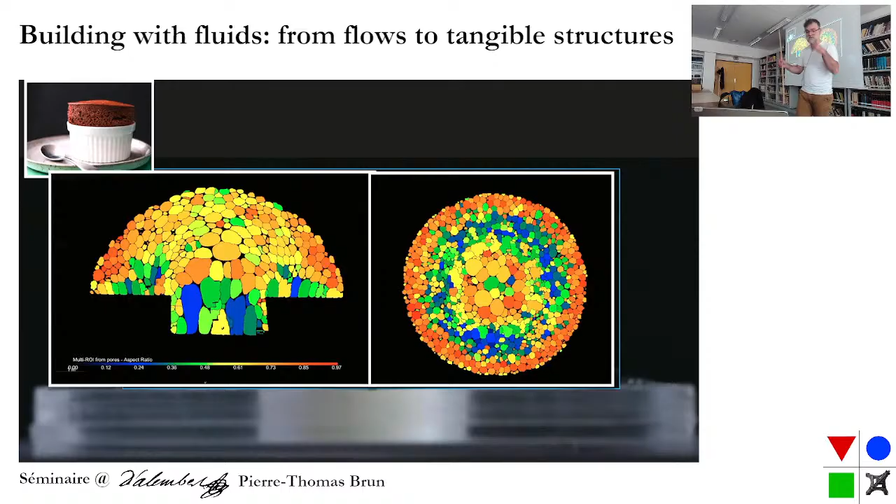It's not just exactly like interfacial fluid dynamics in this case, because if you let time evolve, you also have additional weird effects that are a bit like when you're making a souffle. So these are things that we're actively investigating, and this is due to the fact that you have a lot of things happening inside your structures in terms of the aging of the foam and so on and so forth.

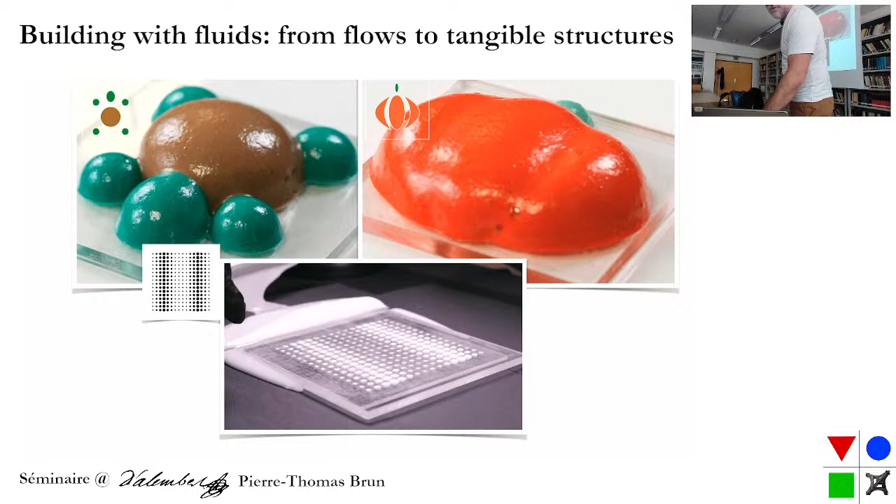But you can play nice games. So if you make a number of these foams meet in some places, you can quickly assemble very important shapes like a turtle. And yeah, it's fun. Okay, so what about 3D?

Okay, yeah, I'll say a few things about that, because I think it's in line with the story I've told before. So one thing that I want to pursue is to stack instabilities basically on top of each other. So this is something we've done a few years ago already, where we're moving this coiling of glass in the form of a cylinder. And so what we obtain is this shape, but it's not very easy to photograph glass. So I'll show you the CT scan.

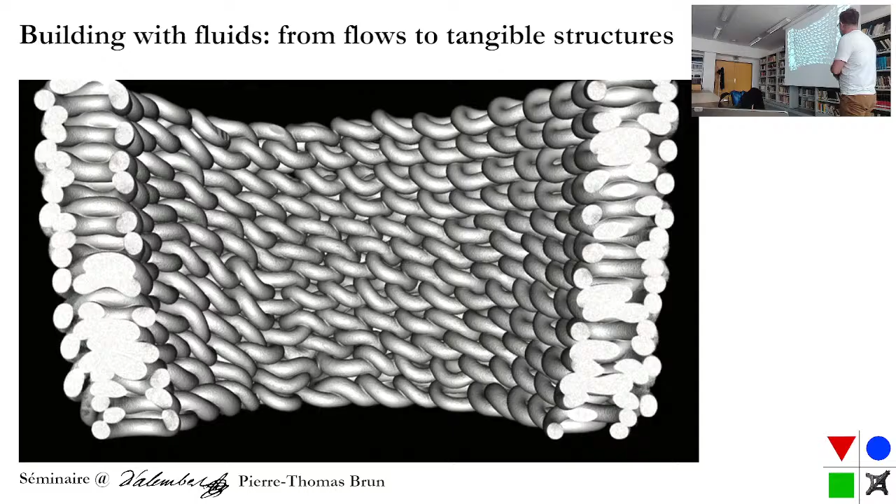Essentially, this shape is a non-woven texture made of glass, and a number of very intriguing problems for fluid dynamics. First, how much these things are fusing together. Second, what is the pattern selection, and then third, what is essentially the overall mechanical response of this type of material. So this is something I will be working on in the next few years. I think I've said that.

And another intriguing theme that we are starting to explore, actually already for a few years now, but I would like to keep pushing, is this idea, right? So we know, and I think you have to live under a rock to ignore the idea that people are looking very actively at active matter. And so I'm not going to explain what active matter is, but I'm more interested in this.

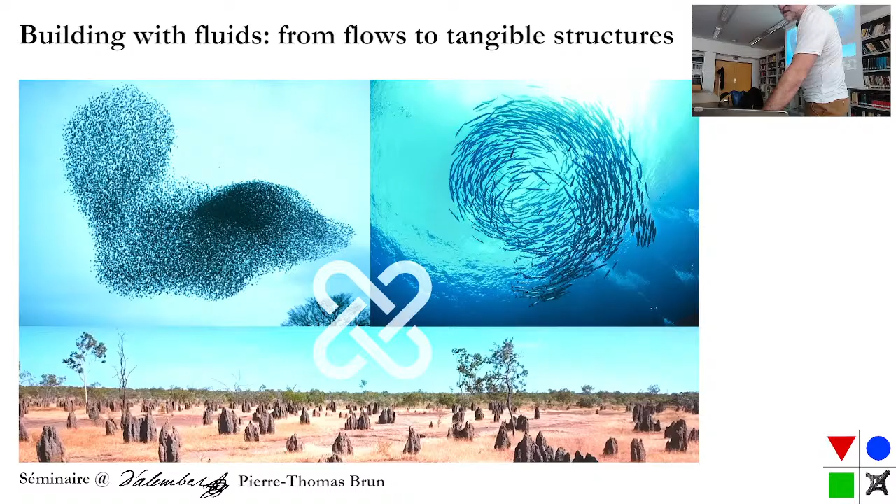And so the question is, how is it that active matter or active material can build structures, right? So for example, the termites, they manage to assemble these very nice structures without having basically a global architect that lays down a plan, right?

So it's a bit like pattern formation, but now with active objects. And okay, so this is what we call multi-agent building, right? So you have it for the termites, but you also have, of course, in the case of bees and honey and everything. But I'm not a biologist, and I don't want to have bees in my lab. So these are the bees we have. These are called Hexbugs. I'm sure you may have heard of them. They are just eccentric motors that vibrate, and they have little legs that look a bit like a toothbrush.

And if you put them on the surface, they will start to walk around and wander. They're not diffusive, but they're not ballistic either, right? So they make some turns.

They're advertised as toys for kids and cats. Kids find them boring after 5 minutes. Apparently, cats like them for a long time. So if you have a cat, that's a good investment. If you have a kid, well, it's not expensive. So, buy a cat.

Buy a cat, exactly. Okay, and by the way, this is the orange stuff. And what we do is that we actually print these collars, and we bind 2 of them with elastic beams. And so you load an elastic beam. If the beam is thin enough, it buckles. They align in the same direction, and then they become more or less ballistic, and they advance. But they have a bumper, and they can interact with the environment with this bumper.

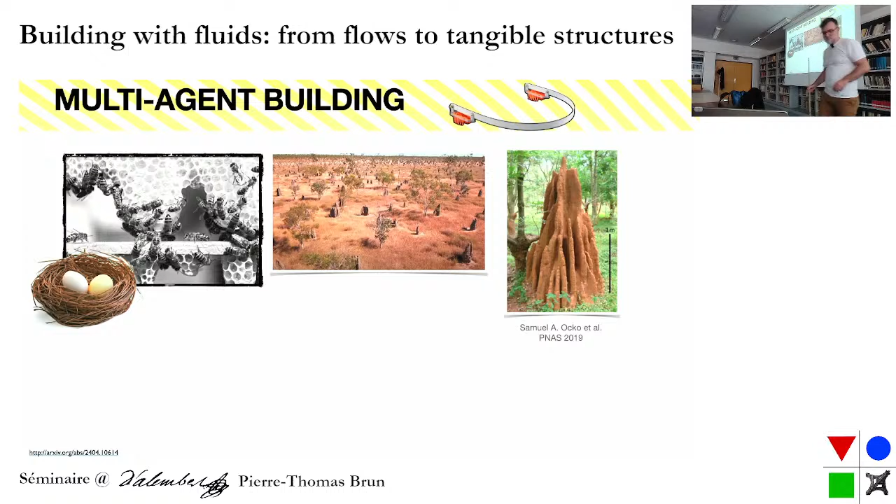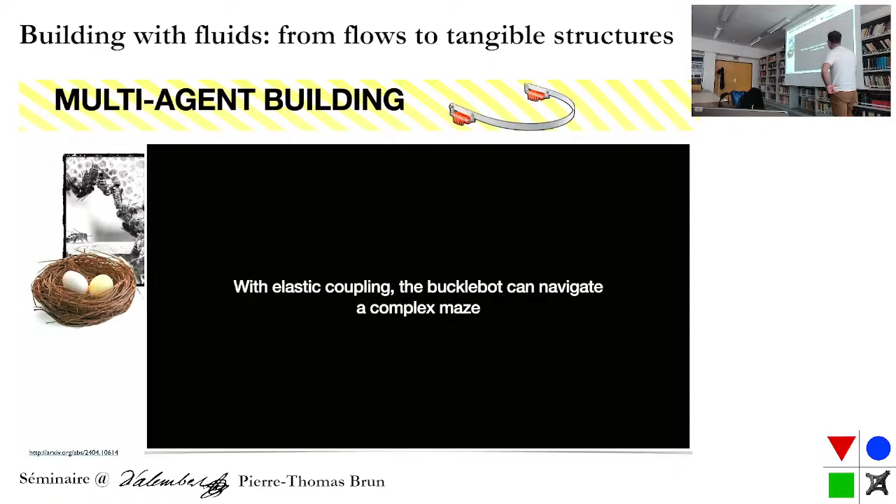So if they're alone, they're not very clever. If the goal is to go here, this guy will go. It will take a very long time. But now if they're together, they can actually solve complex problems. Not really, but they happen to actually navigate the maze. They implement what is called the wall following algorithm. So if you're ever in a maze, you follow one wall and you can solve the maze.

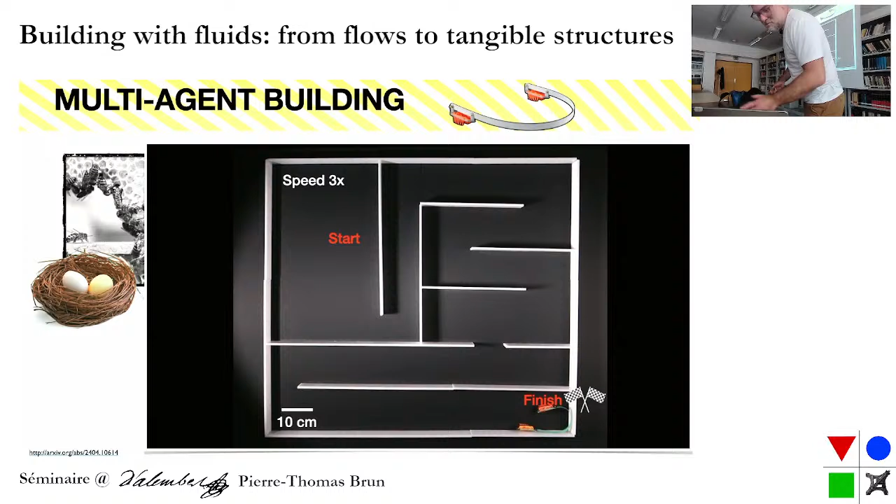So that's something that we've done and published, and it's a fun problem for people who like to worry about elastic rods. But now the new thing that we're looking at is how they evolve into granular material, right? So now they're moving into this forest of granular structures, and they manage to coagulate essentially these things. So you can revisit some classic problems of coagulation that will tell you that the number of granular material will actually decrease exponentially initially as a function of time. And we have an improved theory now, it's now on arXiv, that predicts basically what is this plateau.

But what I want to do is going back to the theme of kids. You have these things where you say link the numbers 1, 2, 3, 4, 5, and the kid draws, and eventually you get a fish. Right? And so the question is, how can we subtly direct these robotic assemblies to, instead of making these, the aspect ratio tends to be around 2 of these structures, instead of making these things semi-randomly, how can we direct them to assemble something that is, let's say, a fish, right? Okay, I don't know. That's what we're doing next.

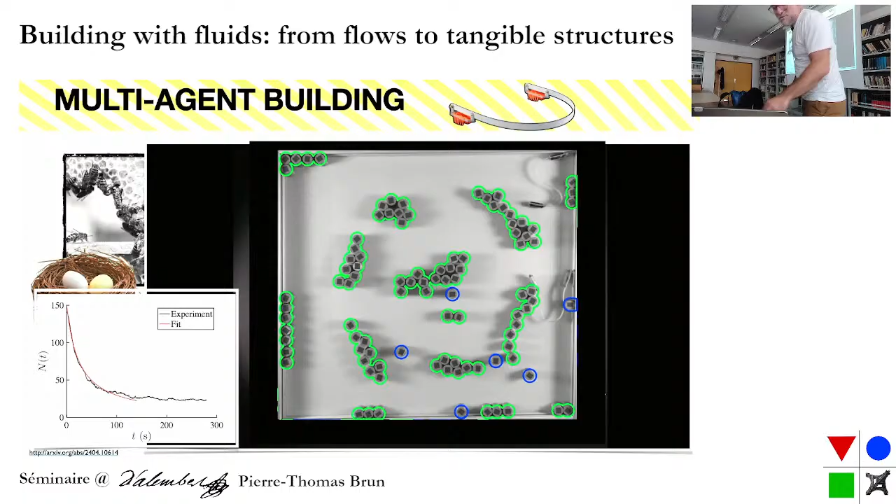All right, so that's it for me. I just wanted to emphasize that this is work, of course, that was done by many people throughout the last 7 or 8 years. Some of them are familiar faces, like Joël, a long time ago, or Etienne Jean-Puyer, and many very nice grad students who have been working on these things. And yeah, thank you for your attention.